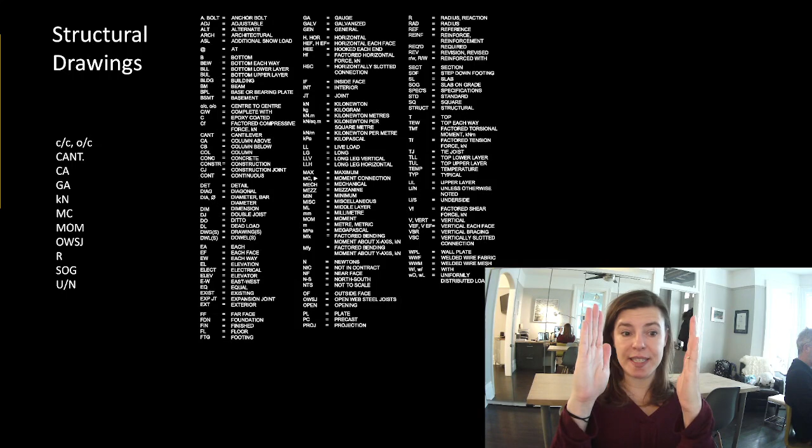C/C means center on center. So that means from the center of one thing to the center of its similar thing, that's the distance. So for example, wood joists, we often say, are 16 inches center to center, or on center, O/C. And we're saying that 16 inches on center is how often that thing occurs.

CANT is an abbreviation for cantilever. We looked at what cantilevers were last week just a little bit. That's that little bit that overhangs the edge.

CA means column above. So depending on how we cut drawings, because we're cutting a drawing, we're trying to take a representation of a 3D thing and represent it in 2D. Are we cutting above and looking down? Or are we cutting and looking up at the ceiling? And there are different ways to do that. And I'm going to talk about that in a few minutes. But CA usually means column above.

So if we have a beam that's supporting a column above, we wouldn't be looking at it if we're cutting below. And we're gonna look at that in a few minutes, so don't worry about that too much. But we would often put CA to let us know that that's not a column supporting the beam, but it is a column adding a big load to our beam.

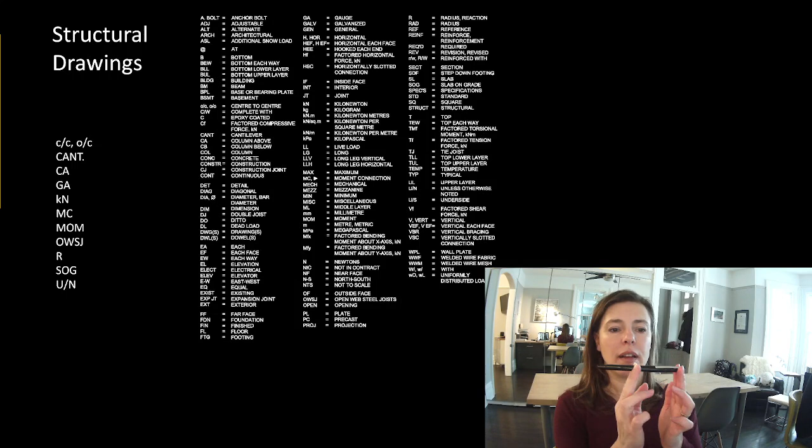MC, moment connected. Moment connected means that something is continuous. For example, our cantilever. If we have our cantilever over here, and this is our backspan, this is continuous across here. But what happens sometimes is we want that to be a cantilever, but we can't put it in like that. What we might do sometimes is cut it here and then put it back together, or we might cut two different things and put them together.

When we put them together, we're saying it's acting like it's continuous. It is one solid thing at that joint, and we're saying it's moment connected there. MOM is another way of saying moment, so sometimes we'll refer to that as moment.

Open web steel joists, OWSJ. That is something we use a lot in steel structures, not to be confused with wood joists. They're a very different thing. Open web steel joists, I have a slide of them in one of the next slides to show you, but you've all seen open web steel joists.

In this context, we're talking about reactions or radians, but radius, but often reaction or radius. So you'll have to look at the context sometimes.

SOG, slab on grade. That's the bottom level surface of your building that touches soil. Very rarely would we have a building without a slab on grade, but most buildings have a slab on grade and it is directly on the soil. And we'll talk about that this term.

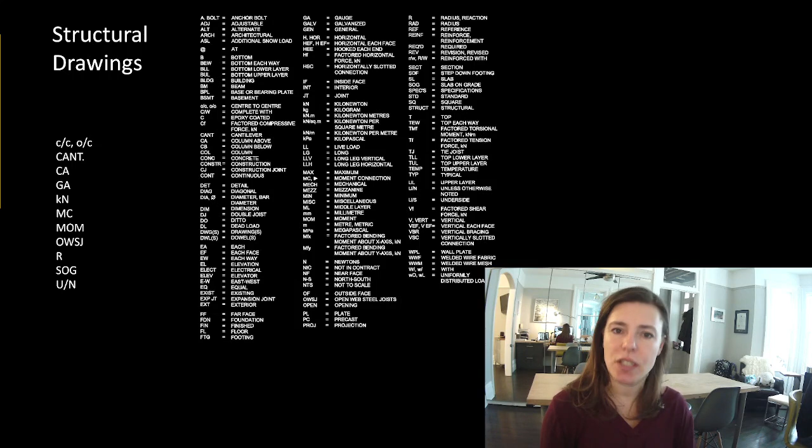UN, U/N, unless noted. So remember I talked about wood joists, 16 inches center to center, unless noted. Because maybe there's a location where we have a big gap because there's a hatch that needs to go down there or something. But that would be unless noted, U/N. You might often see me write B/C, which stands for because.

All right, in this term, these are the major ones we're going to talk about. CF, factored compressive force in kilonewtons. So remember I said if it has that little subscript F beside it, it means we've applied all the load factors to it. And remember if it has the subscript R, we're saying we've reduced the compressive capacity of that member. And remember, the reduced capacity needs to be greater than the factored load on it for whatever force type we're talking about, whether it's compression or moment or shear or tension or torsion.

We're not really going to talk about torsion in this course, but it's nice to know that torsion exists. So these are the ones we're going to talk about this term. Next year in Structures 2, we're going to be talking about all the little subscript R's. So instead of CF, we'll be talking about CR. We're going to be talking about CF too. There's a kind of a continuity between the two terms, but we're going to focus on that compressive resistance next term because we'll already know how to calculate the factored compressive load. And so instead of MF, we'll be focused on MR, VR, and TR.

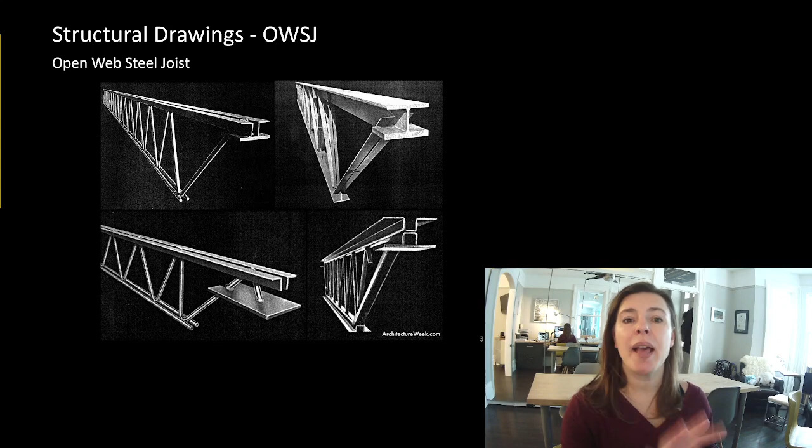Okay, I'm going to fly through a few of these things. I'd just like to get to the next segment, and then I'll stop it, and I'll go spend the day with my kids, and the next time you see me, it'll be late and I might have a glass of wine, apologize in advance, but if it's 9 o'clock at night, I'm going to have a drink of wine. I'm assuming some of you are watching this in your pajamas. Maybe you're drinking a coffee, maybe you're enjoying some other substance, but I might have a glass of wine while I'm filming later.

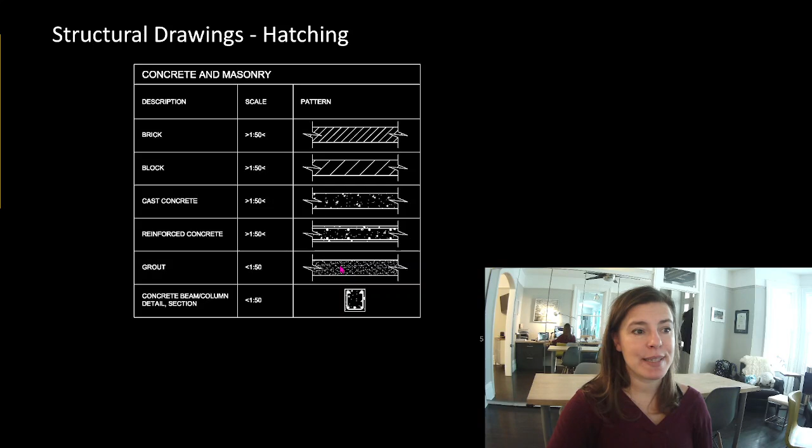Okay, I'm gonna stop here and pick back up a little bit later, but this was helpful.

Thank you guys. Okay, my husband has said he'd take the first round this morning, meaning I get to do a little more of the lecture this morning. So some of it still might end up being tonight, so I've made another coffee

and we're ready to jump into structural drawings. So I have created for you specifically a fake building. Now, I have created the building in steel and I have created the building in concrete.

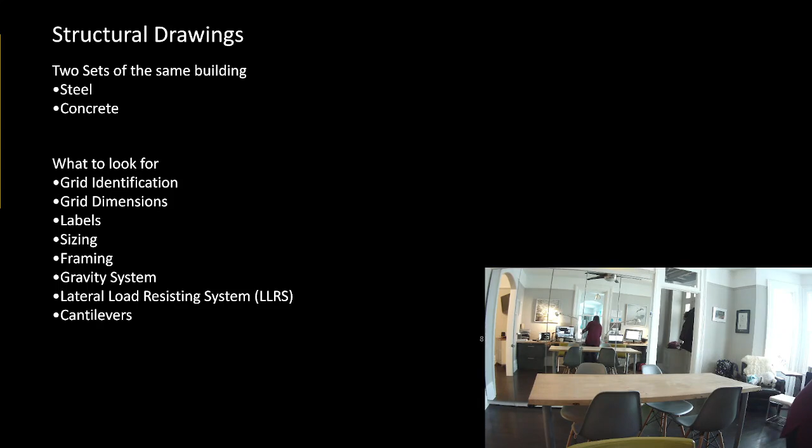In that framing, we need to have a gravity system, and we need to have a lateral load resisting system. I found my little tools for showing you guys lateral load resisting systems, and where did it go already? Hold on one second here, team. I dug through everything and found it. Here it is. Okay. Lateral load resisting systems.

This is not a wall. These are columns, and this is the beam at the top. That tips over. These are able to rotate here, so they're able to just tip over. That does not have a lateral load resisting system. If all of our building was a series of these along its length, the whole thing would still tip over. What we can do is put this in here. This is a brace. This makes it stable. That is our lateral load resisting system.

Another way we can do it is, oh, my new phone isn't the same size. My calculator? Yeah, okay. So this doesn't quite fit. Doesn't fit at all. Used to have something that was the perfect size right here. My wallet? No. Well, anyway, a wall is when we fill this in perfectly. What I'll do is I'll cut a piece of cardboard for the next time we talk to each other.

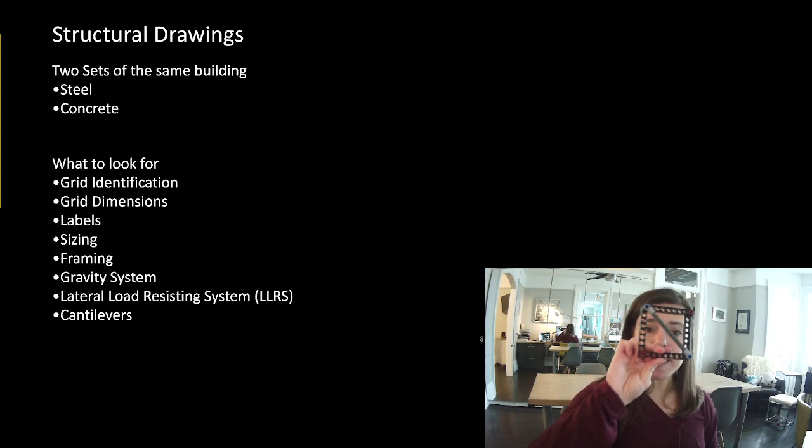So you could imagine if I cut a piece of cardboard out and fit it in here, it still wouldn't tip over. That would be a shear wall. Now we're gonna talk about all of these things later in the term, I promise. But this is your first identification of a lateral load resisting system. It's what stops it from tipping over.

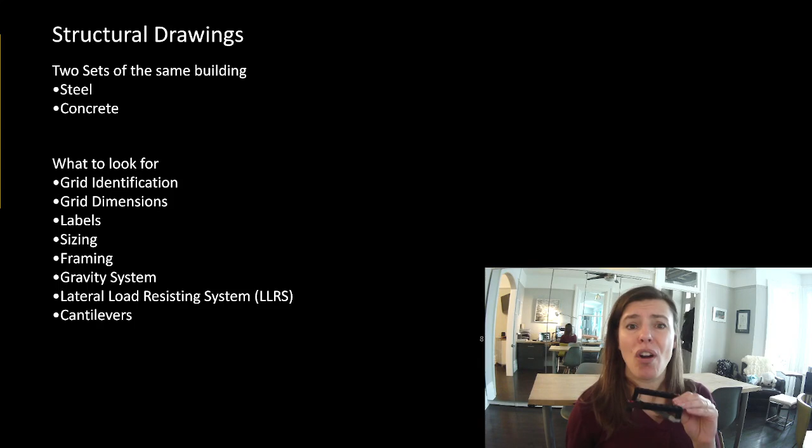We also, in plan, so if this was our floor, we need it to not do this. This is called skewing. We need our floor to not skew. So in plan, we would often do something like this. Although, what do you often have sitting on something? A deck of some sort. Plywood, maybe you've got a concrete floor. There's something, you don't want people to fall through the holes here.

In a wall, you want a doorway here. So this kind of makes sense. But for a floor, you don't want anything to be able to go through here. So we often, already embedded in this, have something here that can act as our lateral load resisting system in our diaphragm instead of that. But again, we're going to talk about all of that later in the term. So don't worry about that right now, but I am going to identify the lateral load resisting systems in the drawings. And you guys will need to do the same when you get into structures too. It's going to be very important.

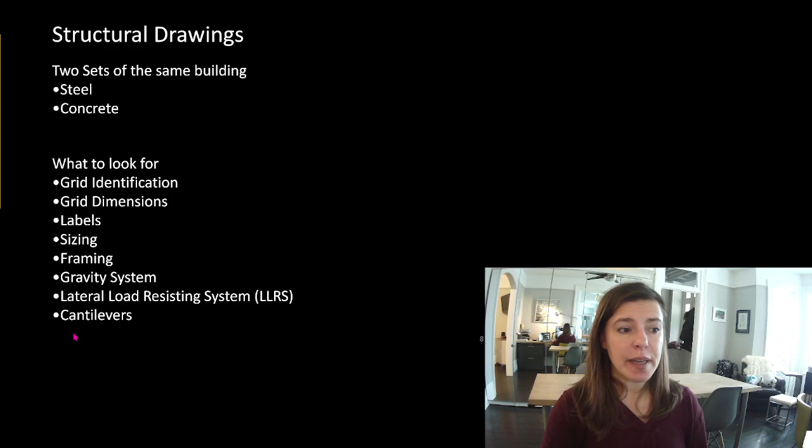Cantilevers. Cantilevers can be shown two ways. They can be shown as continuous over a support. So remember, this is our columns with a cantilevered beam, and this is one continuous member. I could cut this pen here and glue it back together, and that is also a cantilever.

All right, so let's see what I have in the drawings. No, I just have the drawings like that. So I'm going to pull them up in PDF for you guys, just because it's a little bit easier. Okay, so this is our steel building. Let's see where we start with this. Not the first page. So here's the first page.

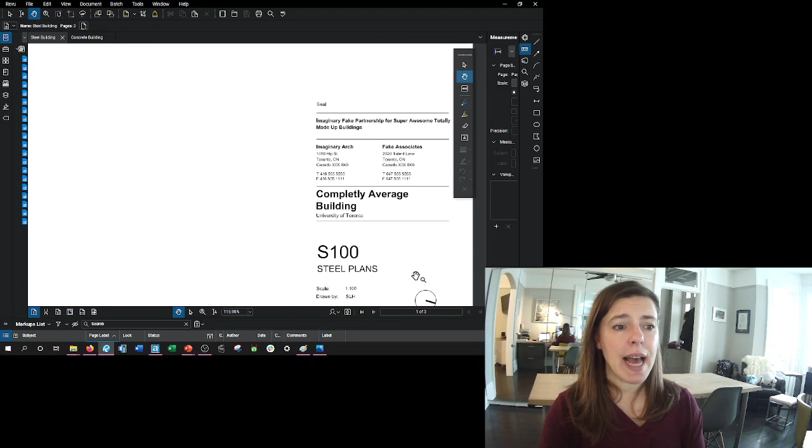You can see that I have a name for this plan. I've identified what's on this plan. I have a scale. Scale's really important. If you don't have a scale, you should show some dimensions because you need to be able to tell people how long things are. Remember, somebody needs to be able to build this. But a scale is helpful. I've got the normal stuff, like what my project is, who's done this work. I've said when I've issued it, so I created these drawings. So you can see I started this project in 2019, my fake project. I've started putting pieces on this every year.

So this project in a way tries to include all the things, which makes it a bit of a ridiculous building. I don't think anyone would actually build this building, but I've seen parts of this building in other buildings. So this is representative. I'm trying to grab all the things I could imagine you'd see in basic construction and put it in one building. But that means we have some things that would not be normal in a building, if you will. So let's take a look.

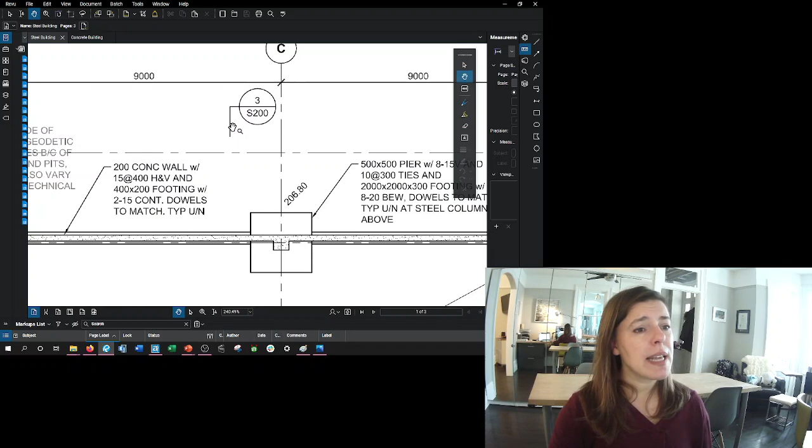Looks like this is the outline of our building. We've got grid lines. So I've got A, B, C, D, 1, 2, 3, 4. And I've got dimensions between all these grid lines. So grid line A to grid line B is 9 meters. Looks like I've got some section cuts here. So somewhere in this set, it looks like somebody took that building and sliced a line, and this little arrow means that we're, for you guys, looking that way into the building. What else have we got here? Oh, look at this. Oh, that was weird.

It says that this part is unexcavated. Now, foundations, so actually, let's see what drawing we're looking at here. We're looking at the foundation plan. So the basement floor datum is at 0. So the basement floor is at 0, and that's at geodetic elevation 205. Where crossed and noted, the local datum for raised or lowered areas is given to the basement floor. There's some other notes here. Okay, so these are the normal notes you would see on a set of drawings.

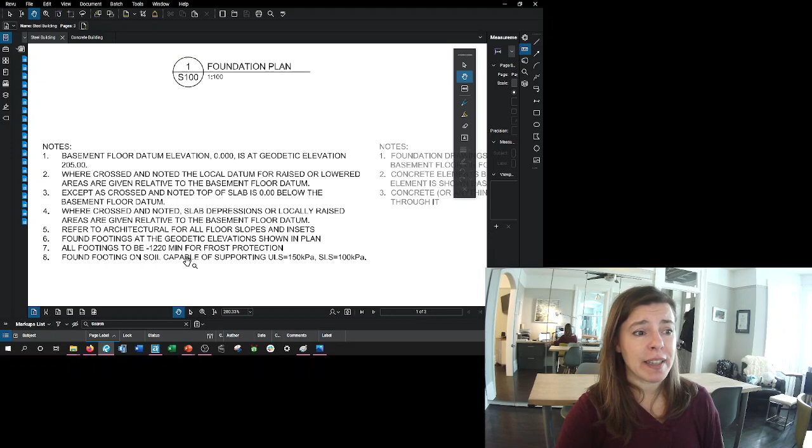Look at this. Found footings on soil capable of supporting 150 or 100. All footings to be minus 1.22 meters min for frost protection. These are things we're going to talk about later in the term. 100%. In fact, this line here is one that I will definitely have in the final exam, promise. But we'll talk about it again, so you're going to hear me say that more than once. These notes are the ones that are explicit for us to talk about. So the light gray notes wouldn't normally show up in the drawings.

They're the things that are already understood by most people looking at the drawings, but I thought you might not have seen them before, so I wrote them out explicitly. So foundation drawings are typically cut above the basement floor plan or footings and look down. So what we're saying is, if this is our building and this is the basement, ground is right here, level 2 is here, and the roof is here.

So if this is ground with a ground floor and this is a basement, we're cutting in between those two things and we're looking down for our foundations. I'm going to tell you that's the only time I do that. It's the only time I cut and look down. So concrete element beyond another structure is shown dashed because we can't see it. And anything that we're cutting through is hatched.

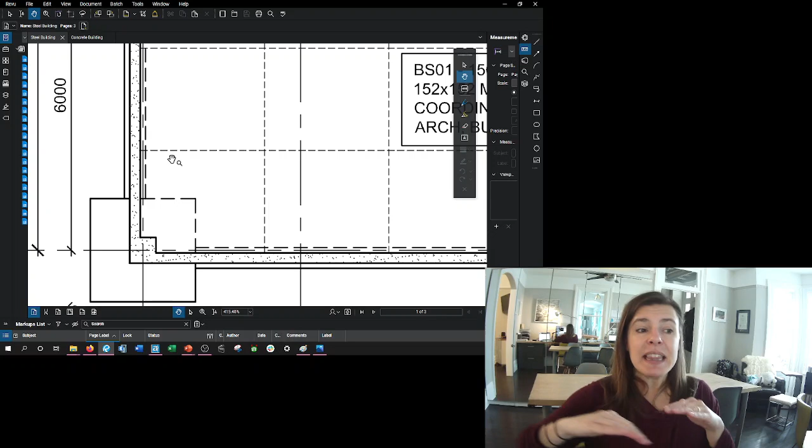So let's take a look at what that means. So if we're cutting between the basement and the ground floor, we're cutting and looking down. That means any walls we're cutting through would be hatched, and the footings, which are below us, would be a solid line, unless it's below something else and then it's dashed. So this is our basement floor. So we're looking down at our basement floor. And it says it's a 150 slab on grade with mesh in it and saw cuts.

This is our wall. So we're cutting through it, so it's shown hatched with solid lines. We're looking down at a footing. So here's a footing. This part of it is solid, but this part of it is dashed. What's preventing us from seeing this part of footing? Yeah, it's the slab. We've got the slab on grade here preventing us from seeing it because the footing is just underneath the slab. We've got dimensions here. You can see we've got more footings.

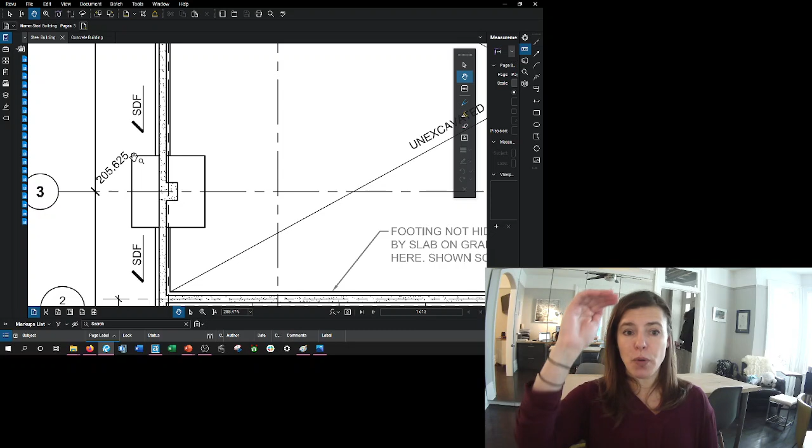Over here, look, these footings are drawn solid, and this says unexcavated. What this is saying is there's a basement here, but not a basement here. There's a ground floor, and so these foundation walls are just for frost protection to protect this part of the basement. We've got a note here. This is saying the bottom of the footing. So this says where the bottom of footing is in a geodetic elevation. This SDF means step down footing.

If this is a basement, we have to dig down some amount and take out all that soil. This here, we have to dig a little bit where we're putting the foundation walls. And you saw a note on the drawing that said we have to be down at least 4 feet or 1.22 meters for frost protection. But 4 feet isn't enough for a basement, which means obviously these footings need to be a lot deeper. So we have to get from 4 feet down to someplace deeper. Well, you can't just go along with a footing and drop down and keep going.

Remember last week I talked about how if you dig a hole in the sand and you stand beside it, it wants to push that soil in. Well, that's called an overburden. If we did that right here, we'd be pushing hard on these footings, and we'd be undermining this part of the footing. So what we do is we step it down slowly. And so these little arrows are telling us that from this datum to this datum for underside of footing, we're going to be doing some transition. And I show you that in the next page, so don't worry about it.

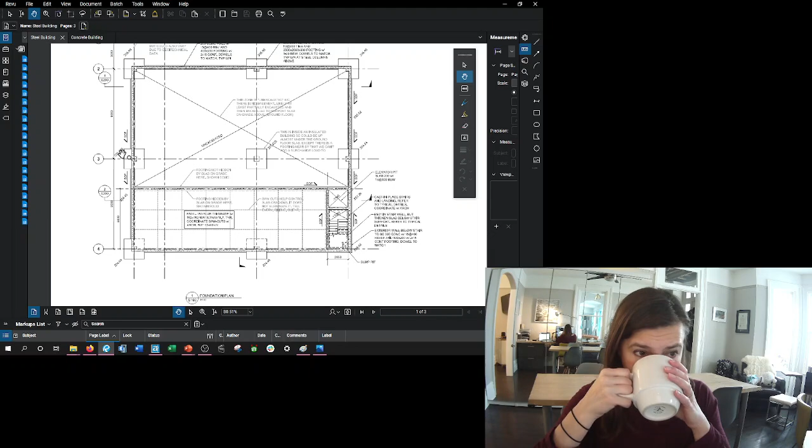We've got some stuff happening over here. Okay, we've got an elevator pit here. We've got a stairwell. So we're showing this stair. There, it looks like there's a doorway that you come in here. And you go up like this. We've got a little thing here that says sump pump. So usually we have to pump water out if ever it flooded in here. And so this is where all the water would drain to.

What other plan notes do I have? Okay, so these are the things I told you about the slab on grade hiding this. So this is inside the insulating building, so it can be almost to the underside of the slab. This doesn't have to go down 4 feet because the building is protecting it from frost. This zone is unexcavated because there is no basement, likely at least partially excavated and then backfilled to support the slab on grade above. That'll be shown on the ground floor. So let's go to the next drawing. We'll come to this in a minute. All right, we've got all of the same grid lines.

This says it's, whoa, that's weird that it's zooming in hard on me there.

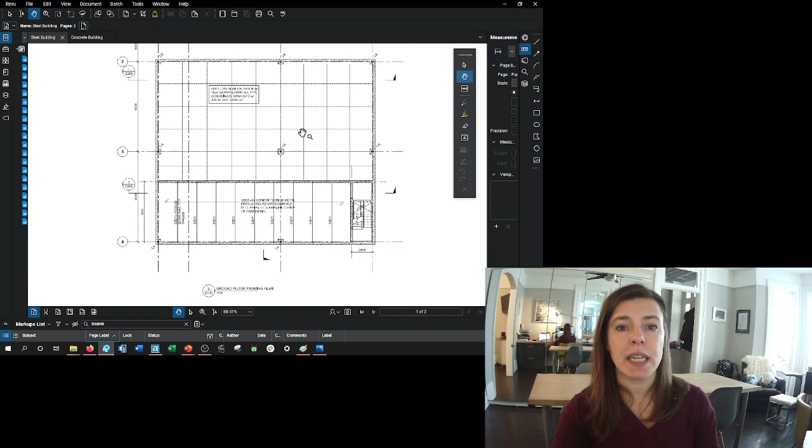Ground floor framing plan with our scale. We've got section marks. So now look at this one. This has a basement underneath it. This doesn't. This part of the floor is sitting directly on soil. So we have a 150 slab on grade. It's the same slab as what we had in the other basement. We've called this one GS01, or ground slab 01.

Let's see what we called the other one. BS01, basement slab 01. I called them 2 different names even though they're the same thing. I could have kept them the same, but in my experience, sometimes what might happen is I'd make a change here, but I didn't mean for it to make a change to this one. So I often would like to name them with different things. Sometimes the other way is helpful. It really depends on the project and what your intent is.

Okay, so let's take a look at our notes here. Ground floor datum. Oh, look at this. Live load. Typical ground floor dead loads. We're going to talk about loads in a few weeks. All right, over here in our plan notes. This is cut looking up. So we're cutting through the foundation walls, right. So this is just before our ground floor. We're cutting looking upwards now. We're cutting in the exact same spot as before, but looking up now.

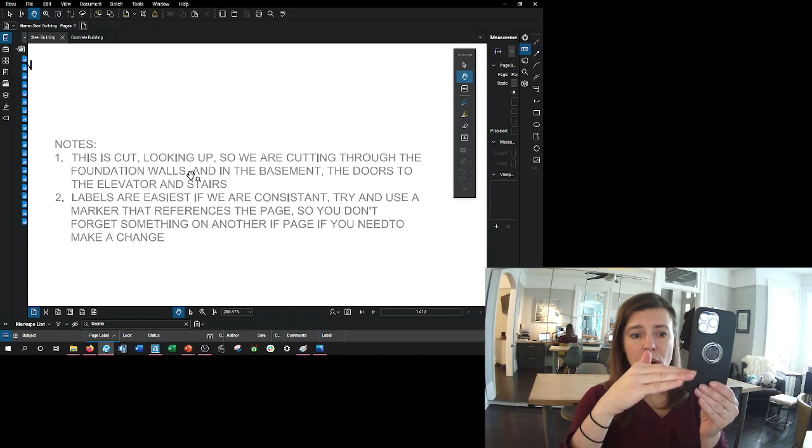So remember, basement, ground floor, second floor, roof. Before we were cutting here and looking down. Well, now we're cutting in the same spot and looking up. So we're looking up at the underside of the ground floor, but we're cutting through all the basement walls. So we show our walls the same. We're not looking at the footings anymore. The footings were on the other page when we cut and looked down. So we see the framing for the ground floor, and we see our slab on grade here, but we're cutting through these foundation walls.

Now look, I've made a note CA, or column above. That's telling me that my column is sitting above what we're cutting through. It's helpful to show this column though, because it gives a little bit of context. It tells us that we've got a big point load here. It's very handy to get in the habit of showing your column above where it stops, even if it isn't on your plan. If this was 3 stories up, I wouldn't do that because it doesn't really have an impact on this particular plan. But I know at the top of this concrete wall, I have a column sitting here.

And that's handy to let me know why I might have this notch out here. See, if I had brought this wall right around like this, there would have been nothing to support this column. So I kind of notch out my concrete here so there's something to hold my column up.

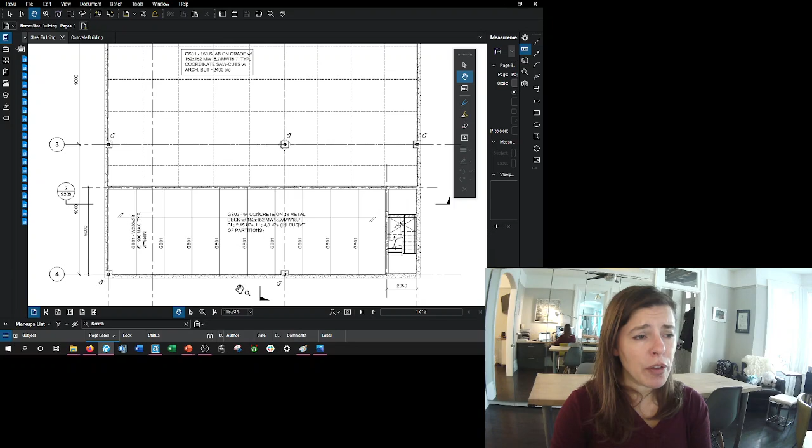All right. What other information? Oh, look, I had to add this dimension here because this wasn't on a grid line. Now, I would always recommend to an architect that we make this a grid line. If there is major structure on it, it is very helpful to give it a grid line name. Grid lines are helpful for architects, but they're vital for engineers. We really like major elements on grid lines. What I would often do, even if the architect doesn't have a grid line, is I would maybe call this 3' or 3x or a little i, something that I could then communicate in a schedule what line this is.

Okay, what else do we have here? Before we had been cutting through a wall looking down, now we're cutting looking up. We've got our doorway cut, and look, you can see that we're showing framing for this stair. Those dark black lines are saying we've got steel there. It looks like at our ground floor we had cast-in-place concrete, but up above that it looks like we're switching to steel framing. There's our elevator.

Okay, let's take a look here. GS02. Well, our slab on grade was GS01. This is our ground floor slab number 2. It's saying it's 64 concrete on 38 metal deck. Again, we're going to talk about that later, but just to help you out, metal deck, when I say it's spanning in this direction, if I take this piece of paper and try to support it here and here, you know that it does this. It doesn't have any strength. But if you want to, try this out. If I accordion fold this piece of paper, so I'm just folding it like an accordion.

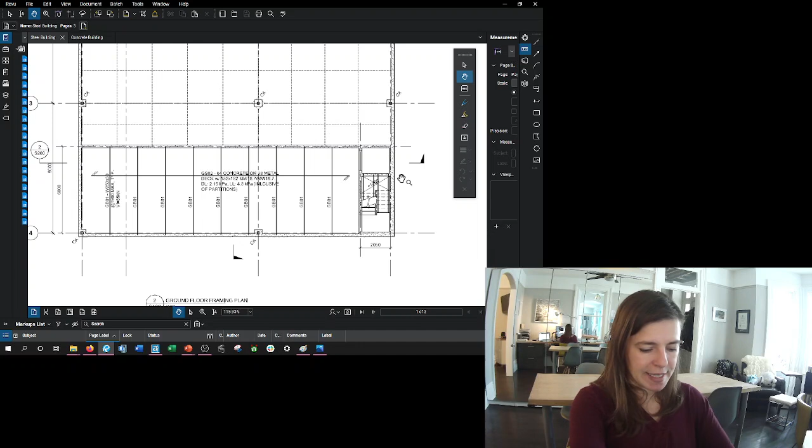It's kind of crazy. Okay, so I've got my accordion folded piece of paper like this. When it was a flat piece of paper, I couldn't make it sit on my hands. But look at this. It's the same dimension and it's the same piece of paper. And I've put it like this, supported in the same way, and now it spans from this hand to this hand. That is the span length of our element here. So, what happens though if I try to put it this way? You know, it still doesn't work.

Intuitively, you know that. So when I show these arrows here on this deck, I am saying my deck is spanning like that. I am not spanning it in the other direction. It is not spanning in this direction. It is spanning across the top of all of these beams. So we have a series of beams here supporting this deck like this. So in fact,

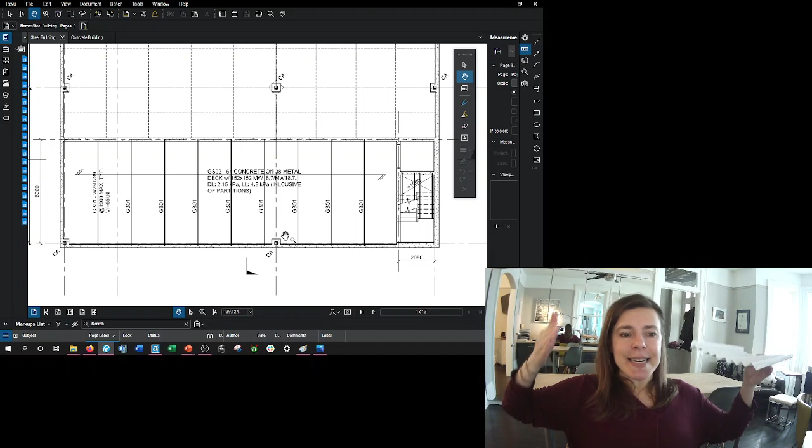imagine this folded paper kept going and it was this long. It couldn't span that whole distance, so what I've done is I've put a beam here and a beam here and a beam here and a beam here and a beam here. The span length is the distance between those beams. If this paper was really, really long, it still couldn't span that distance. It needs a support every so often, even though I've made it folded so it has some rigidity. So those flutes are running in this direction, and these beams and this wall are supporting the deck.

You're going to get used to this. That means this cut here, I should be able to see my little flutes when we get to that. So let's just keep that in our head, GS02. We'll see if GS02 shows the flutes cut on that.

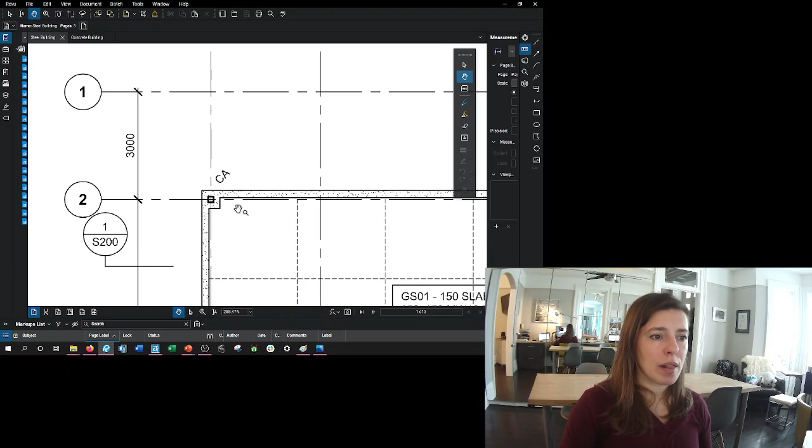All right, let's look down here. Let's see what this is. This says steel column schedule notes. So this looks like all the information about our columns. Look at this. Let's pick a column. Let's go to this one, A2. So A2, looks like here we've got a footing and a blob of concrete when we were cutting looking down. When we were cutting looking up, it said there was a column above, and we see there's a blob of concrete, and we know up above there should be a column above. We haven't looked at it yet, but let's see what A2 has to tell us.

Very first one is A2. So look at this. Here's level 2. Here's our ground floor. It looks like our column starts just below the ground floor, and here's our basement floor. We were cutting here and looking down the first time. The second time we were cutting here and looking up. We have our loads, and we have something that says refer to plan for our footing. Let's go back and look at our plan and see what it said.

Oh, look, 500 by 500 pier with 8 15s vertical and 10 at 300 ties, and a 2 meter by 2 meter by 300 millimeter footing with 8 20 bottom each way, dowels to match, unless noted at steel columns above. You don't know what the heck that was all about, but you're slowly going to start to learn.

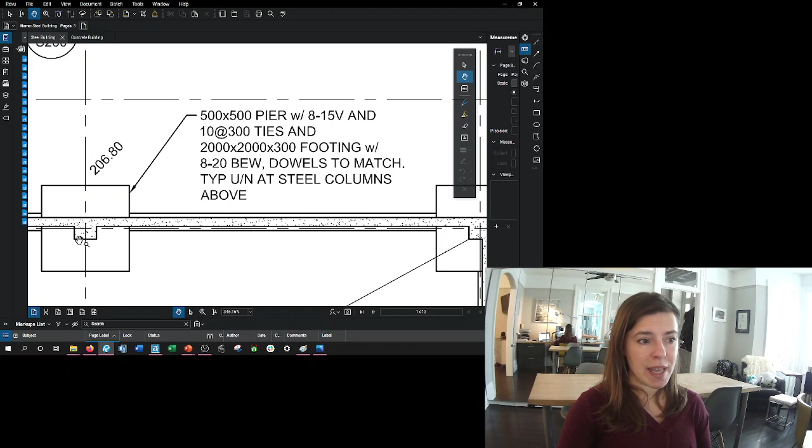This 500 by 500, that's the dimension of that concrete holding up the column. This is just the steel that's in the concrete. The 2 meter by 2 meter footing, that's what's holding up that pier. The 20 bottoms each way, that's the reinforcing. Don't worry about that right now. Dowels to match just means that there's pieces of steel that go from this into this. Okay, let's go to the next page.

Okay, level 2 framing plan. Things start to get a bit busier here. There's a lot going on now. Let's start with our notes. I find that the easiest. All right, level 2 framing plan. Level 2 framing datum. We've got some notes here. It tells us some information about loads.

Snow load. It says ASL is shown. Well, that's accumulated snow loads. We've got low roof dead loads, balcony dead loads, interior dead loads. So there's all kinds of different loads. It seems like they apply in different spots. Like this looks like it's a balcony. This looks like it's a low roof. And this is the interior of the building.

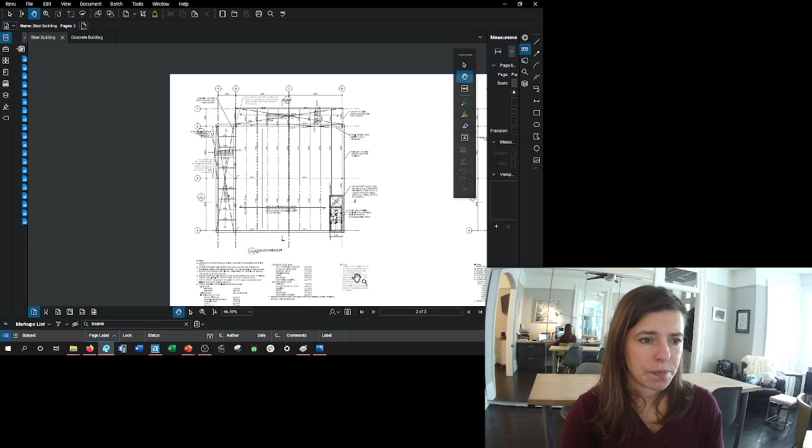Let's look at our notes. This is cut looking up. So we are cutting between the ground floor and the second floor and cutting up, which means the columns from the first floor to the second floor are what we're cutting through. Anything above that, if it's not continuous down through the building, would be a column above.

Let's take a look here now. Let's see what some of our notes are. Column above between second and roof impacts beam, so it's helpful to see even though we aren't cutting through it. So this column, now this is what's important. See this beam, 2B13? It starts at this column. See that it doesn't break here? It's a solid line that keeps going through.

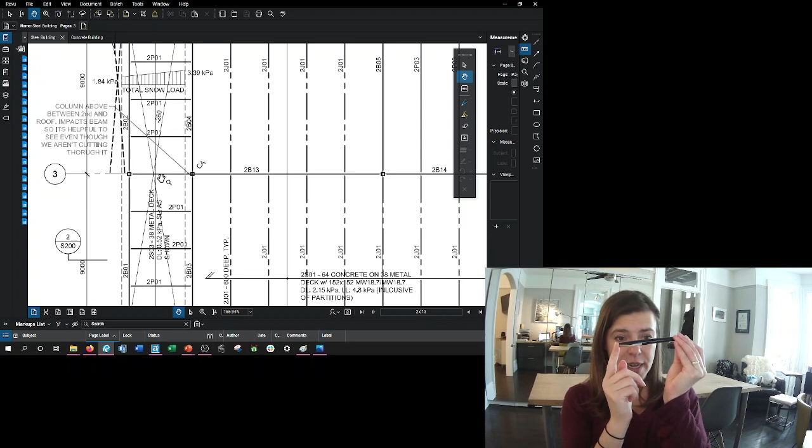And then it's broken here. There's a space between this beam and this column. That tells me that this beam, 2B13, starts at this column and goes to this column. And this column here, CA, is a column above. So I have a beam supported here and here, and right here, there's a big point load coming down on it. This column above is sitting on it. Maybe we'll see that in this section.

We've got, it looks like 2J01. Look at this. These lines are shown funny. They've got this double dash on them. Let's look at this schedule here. This is our steel beam schedule. Okay. Do we have 2J01 on here, or did we choose to put our joist notes right on here? Oh, look at this. 2J01, 600 deep joist. And then all the rest of these are labeled 2J01.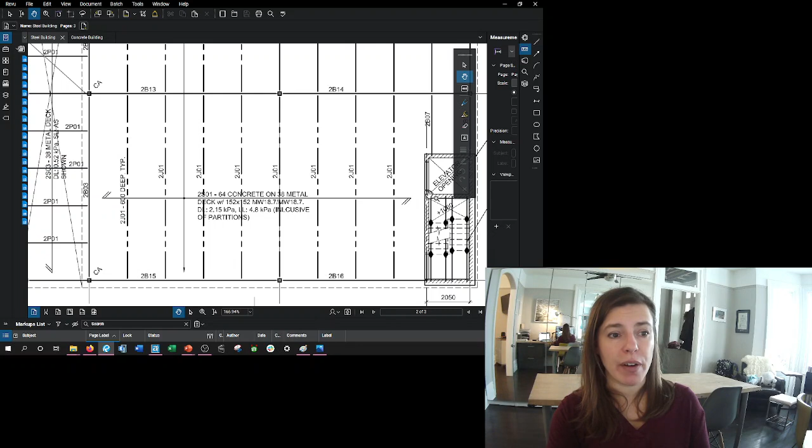So we're saying that these joists are 600 millimeters deep. It looks like we could see how often they exist if we knew what this dimension was and divided it by this many spacings. We've got concrete on metal deck spanning from here to here, but it's got a support. It's being supported every so often. So this deck we wouldn't say it's spanning all the way from here to here. We'd say it's spanning from joist to joist. It's being picked up at those joists.

We've got a stairwell here. This isn't concrete. This is dashed as block. Remember that wider dash line? 200 masonry block lateral load resisting system, LLRS, along grid line D and 4, 190 block remaining core walls with 15M at 400 grouted solid. Refer to typical details for the lintels. Interesting. So lintels are what's over the doorways.

Stair and landing designed by the supplier. But look at this. We're showing that as a beam. What the heck is this big black chunk of stuff in the middle? Well, it looks like a big solid diamond. One of the things we're going to talk about later in the term is that a solid triangle means a moment connection. So this is a landing, and this piece of steel is going to come along, it's going to crank, it's going to be underneath the stair, and then it's going to go flat again.

But steel doesn't exist that looks like that. So what we have to do is take different pieces of steel and weld them together. Remember I said with that cantilever, it could be a continuous beam, or we could cut two different pieces and glue them together. Well, welding them up is the gluing them together. And these black triangles indicate that that's what we've done. Let's see if we have any more of those. Oh, look at this. We do have that.

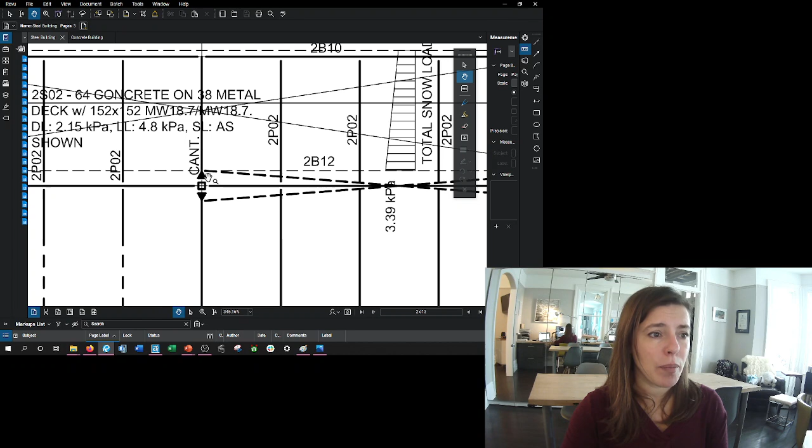This beam here is 2B05. It looks like it's 2B05 here, but it's got a cantilever. C-A-N-T, that was cantilever. Let's take a look at 2B05 because it looks like it might be interesting. Oh, all right, 2B05 is a W610 by 113. They've given us information about reactions. MC, remember that was moment connect. Moment connect right end, and they've given us a load for how much we have to moment connect it for. MF. Remember that MF means it's a factored load. So we know somebody's already factored this.

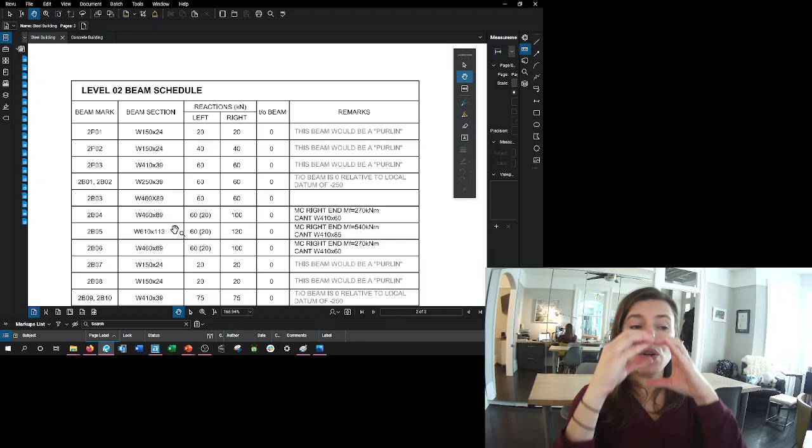Cantilever is a W410 by 85. So it looks like where we cross that line, we have two different things we've glued together to pretend that's one continuous beam. And we should be able to see that in this section. All right, both beams can't be continuous here, so one needs to be broken and welded together or moment connected.

So see, this 2B11 has a column above here. Well, that should actually be a column below. No, column above. So this beam is continuous from here to here. This beam is cantilevered, but this isn't a column here supporting it. It's got a column above. This beam is moment connected through and supported by this beam. So this beam is doing a lot of work.

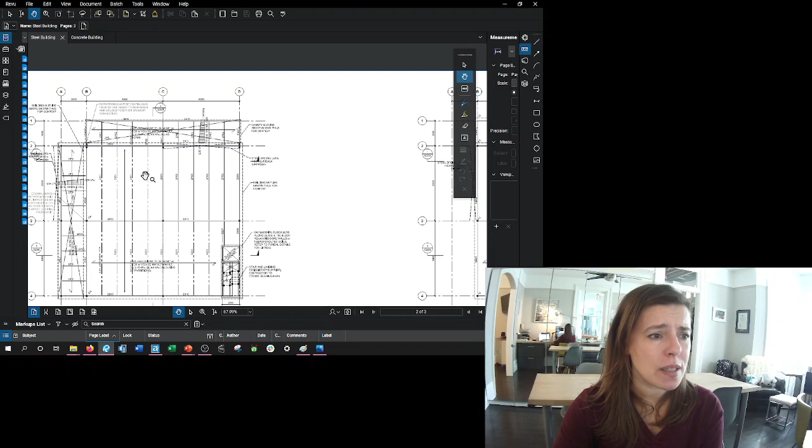Let's take a look. We had these joists here, but look at these ones. 2P03. This just looks like it goes from here to here. It looks like it's doing the exact same job as the joists were. So we had our metal deck that exists from here to here, but it's spanning. So these two little lines mean it's spanning from here to here. And these arrows are saying this metal deck exists all the way along here.

So if this is my metal deck, this is this end, and this is this end, and this is up here, and this is down here. So it's corrugated in this direction. It looks like 2J01 and 2P03 are doing the exact same job, interestingly enough.

But then 2B05, it's got a lot going on. This is a balcony, and see this here? It says our total snow load. So it looks like there's something funny happening here. We don't know anything about snow loads, but that will come up. We'll talk about snow loads in a few weeks.

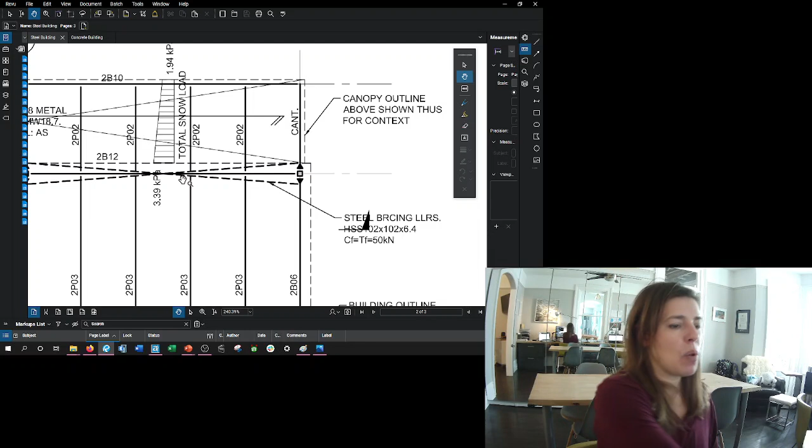What the heck is this dashed line? Steel bracing, oh, looks like I've got a typo there. Lateral load resisting system. So this is dashed because we're cutting and looking up, but we're cutting through something in elevation. Normally we hatch it, but this is a brace in the wall. Basically what we're saying is we've got this with a brace in two directions.

We've got a canopy outline. We've got a low roof here. And we've got our stairwell. So we looked at all the things here. Let's come up to our roof framing plan. So it looks like our roof doesn't come out to here. So our level 2 had a low roof here.

And remember, our basement, our interior part of the building was right here on the ground floor. So this is outside. This is a balcony. This was inside below. Up above, our building is pulled back here, and it still has a canopy on our roof. So here are our roof notes.

We've got loads, we've got snow loads. It tells us that this is our basic snow load with an ASL, or an accumulated snow load. Again, these are things we're going to talk about later in the term. We've got bracing here, steel bracing here. We've got our section marks, and we've got another beam schedule here.

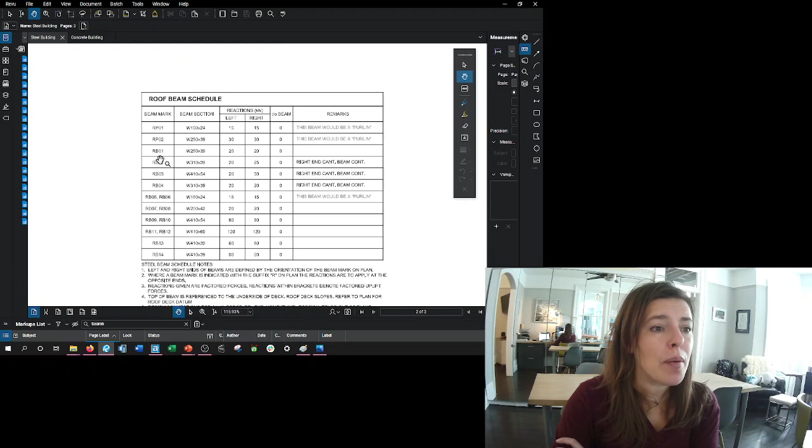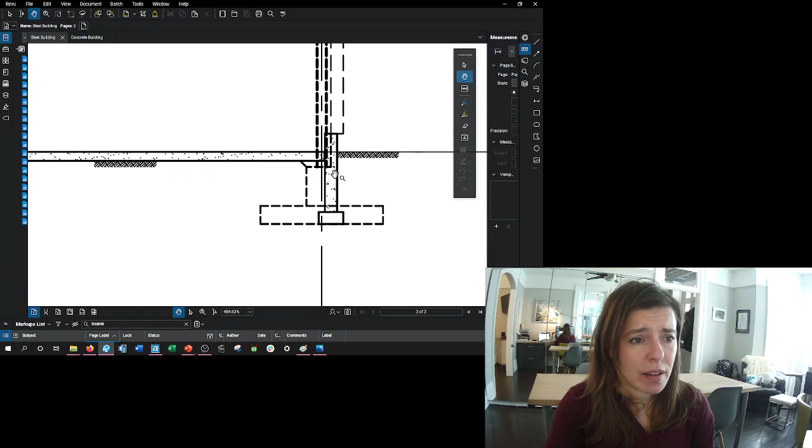If we can, and it's easy, we'll slope the structure. If it's difficult and it's hard, we won't. Sometimes we'll do a combination of the two. But if it's straight line elements and a low point is easy to build into the project, of course we'll put the drain there and just let structure do what it can to slope it for free for us. It's a little bit of coordination, it's a little bit of work. We have to know exactly what your roof drain requirements are, but we can put that into the project.

Let's look at the next section. So this one looks like it's further down the building. We're still looking at A, B, C, and D. This is where we have our basement. So look at the underside of our footings here and look where they are here. So somewhere on that building, we dropped down our footings.

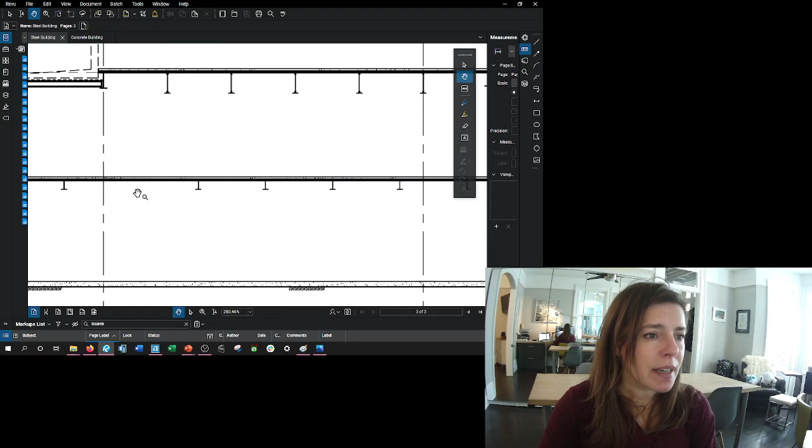We're cutting through our elevator core. So here's our elevator, drops down a little bit. Here is our lateral load resisting system block wall. And we've got structure happening in here. So here is our ground floor that we talked about. Looks like I am missing a joist here by mistake, so that's just a typo. There should be another joist there.

Here are open web steel joists, or a purlin there, a beam. Here are open web steel joists, our purlin, and up at the roof, remember we had that major beam? There's the major beam we'll need.

Again, you don't need to know what all of this is right now. It's a long process. At the end of 2 terms, you should be able to create a set of these. But you also need to be able to look at them to be able to learn how to create them. So this is a process. I'm trying to show you what these drawings look like now so you can dig into them, and then that'll help you understand what we're doing as we go through some of this process.

And here's our section the other way. So let's take a look at this. This is the one that we were hoping was going to show where we glued 2 beams together. Well, look at this. Here is our non-basement zone. Here's our basement. We come along and we have to drop down. We need this load. If this load was up high, it would try to push in on this wall. So we need to drop it down so we're not hurting this wall.

Here's our basement. There's our footing. See, this is where grade is. We're at least 4 feet below grade for all of our footings. We've got our slab on grade, and then we've got our beams and our metal deck. Oh, this is the other one. We wanted to see if our deck was fluted. It's hard to see at this scale, but these decks are fluted, cut here.

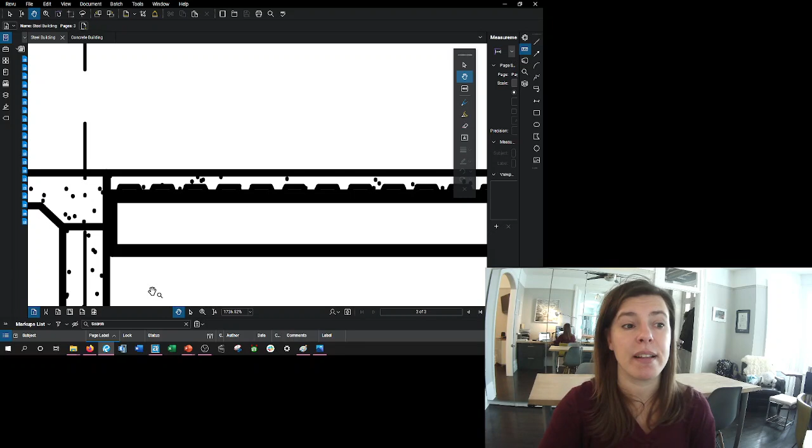Normally, I would then proceed to have some smaller scale sections. Hopefully for you guys, for next year when you do Structures 2, you guys will have this updated with a few more sections cut in it. So we've got open web steel joists here. Here's our major beam that's cantilevering out. This comes along, it breaks here, and here is our balcony that we have.

And so look, you can see this beam and this beam aren't the same beam, but remember in plan we showed that they were moment connected together. So we took 2 separate beams and essentially we had to glue steel together. And this is what I always say. If you need glue or something to stick 2 things together in building a model, you need a moment connection. With this, you can imagine if I glued this joint and this joint together, this wouldn't tip over anymore. What we would have done was made a moment connection.

And we're going to look at, and in this term I do exactly this for you guys, the difference in analyzing the internal forces on one of these and the internal forces in one of these. So we will go through and find the internal loads for all of the members in this and all of the members in this.

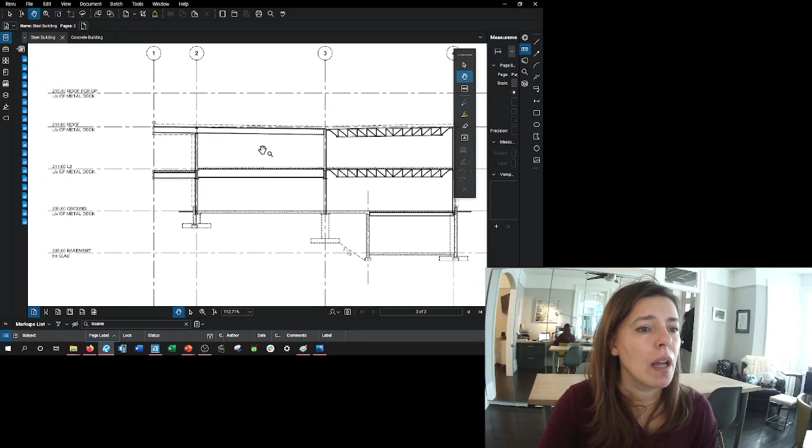Okay, so that's our steel building. I'll go through the concrete building a little bit faster because a lot of the things are the same. We're just switching some things. And a lot of the information is shown directly in the plan versus schedules, at least for a project of this size. So here's our concrete building.

All right, this is our wrong page. Let's go back to the first page. Okay, so here is our concrete building. All of the same information. So it's S100 for concrete plans. We have the same grids. Our dimensions are a little bit different now.

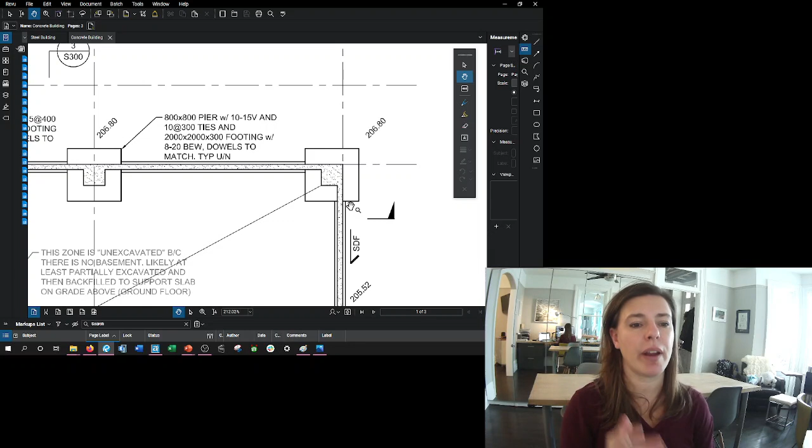Before, we had our grid lines lined up with the center of our steel columns. Here, we have our grid lines to the outsides of the walls. It's a little bit easier for concrete to represent it from the outside of the wall, and for steel, it's very, very handy to talk about it through the center of the steel columns.

Same thing here, unexcavated without a basement. Here is our slab on grade, same thing, footing hidden, saw cuts. A lot of the information is the same. Let's take a look at a few things that are different. This blob looks bigger than it did in the other drawing. These are still typically cut looking up. Everything shown dashed that we can't see, hatched if we're cutting through it.

Almost everything is the same. The grid lines are in a different location, and these piers look to be a little bit bigger, but that seems to be about it. So see, we have 800 by 800 pier.

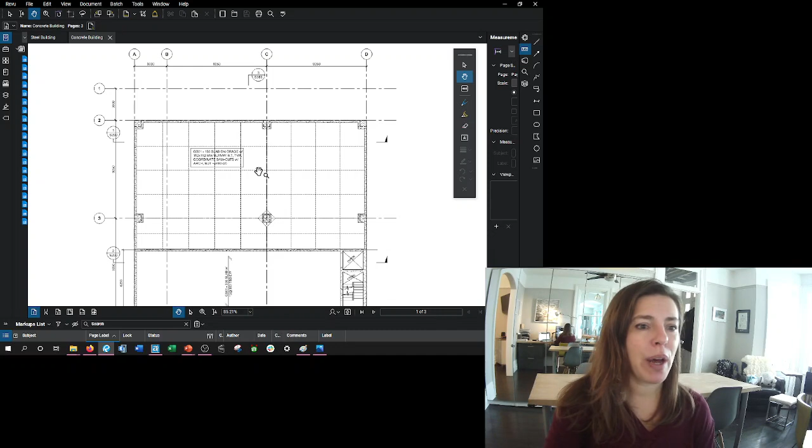Everything okay? Yep. I'm guessing a child pooped in a diaper. Diaper? Oh, just for garbage. Oh, okay. Our 3-year-old is basically a COVID baby. He was 1 when COVID started, and he's been resisting his diaper. So we have 8 months to get him fully potty trained. He's pretty good, but every now and then he likes to surprise us.

Okay. So here is our ground floor plan. This, again, looks very similar to our steel project. We've got a lot of the same notes. Some of our loads will be different because this is a concrete building now. Let's look at what's different. Our slab on grade is the same. We already talked about our piers being bigger. Let's take a look at this zone here where we're cutting and looking up at our structure.

Before, we had metal deck spanning in this direction with joists every so often. And so we had these little kind of double arrow line going from here to here with structure every so often. What we have now is something spanning from this wall to this wall. And we're saying it is a 300 slab with 15s at 300 top and bottom each way.

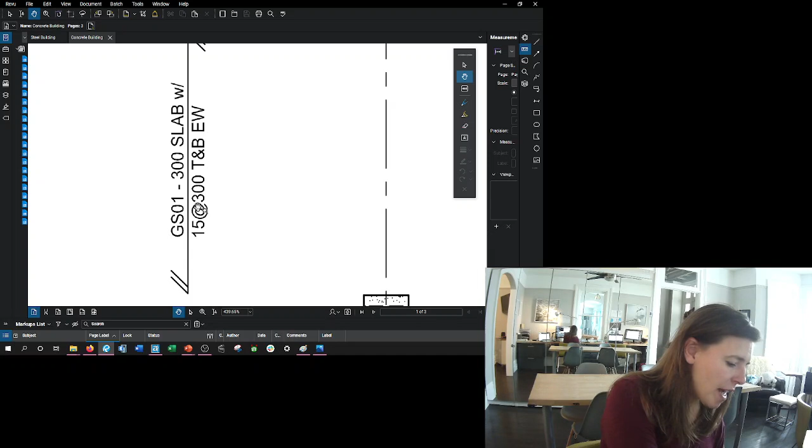This should be GS02, not GS01. So I'm finding some flaws in this. Brace typo. GS01 should be GS02. All right, so this is a 300 slab with 15s at 300 top and bottom each way.

What we're saying is, instead of this spanning every so often, we are in the shorter direction taking a bunch of steel rods and spanning them from here to here and encasing them in concrete. So our slab now spans from this wall to this wall. Our metal deck spanned in this direction, but it sat on elements that spanned from this wall to this wall.

The other thing that's different in this plan is our stairwell. Remember, in our steel building, we had a concrete foundation, so everything was concrete. But going up, we had a steel building with block walls. Well, this is a concrete building. Why would we stop and make the stairwell block? That would be bonkers. So what we have is a concrete core here. So we have a concrete wall, and that is part of our lateral load resisting system. We'll show that on the next plan as well.

So you can see, well, actually on this plan, we still would have been looking up and cutting through the concrete. So we wouldn't have shown anything different yet at this plan, but our stairs were only concrete for one level in the steel building, and then we switched to steel. Here, we're showing concrete on all the plans. So we're gonna have a concrete stairwell. I'm pretty sure I'm consistent with that. Let's see what happens on the next plan.

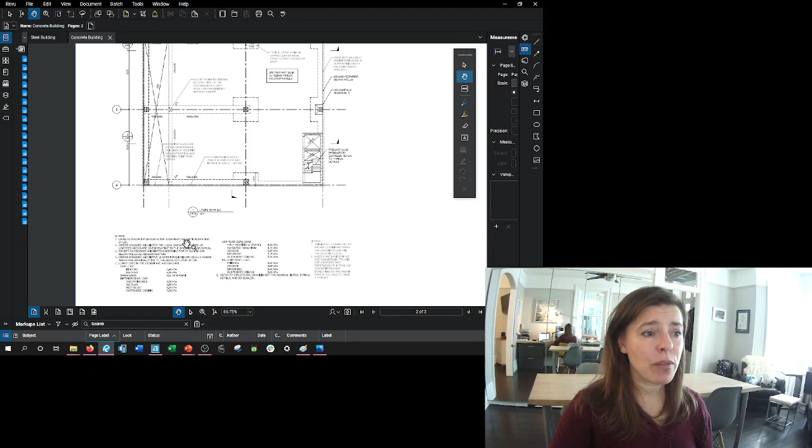Yes. Okay, so here's the next plan. We have our concrete shear walls. We are cutting, looking up at our second floor. This is our low roof, and this is our balcony. Why would we have this roof low? Well, one of the reasons is if these are flush and water pooled on here, it can run inside your building. You always drop a low roof relative to a floor area. It's absolutely ubiquitous. If you have ever been on a deck, you often have your deck down a little bit.

Where that differs is in accessibility areas, but a lot of work is done to avoid moisture flow. And often there is sloping. We'll put a protection above it in some way, anything to protect the system below. Because water getting in things, as you're probably talking a lot about in your building systems lectures, is a huge problem. It's not a structural problem, but it can create a structural problem. So structure will do whatever it can within its scope to prevent that from happening.

Okay, exterior slabs are often dropped for build-up for roofing, waterproofing, and keeping rain from doors. Okay. Exterior grids are at the wall lines. There we go. So what is all of this dashed stuff? What's happening? We don't have any of our steel beams cluttering up this area.

Let's take a look. This is a 250 two-way slab with 15s at 400 top and bottom each way with 150 drop panels. Drop panels are the thing that we put around columns because we don't like the way slabs act in shear in concrete. Remember I said shear is like taking Jell-O and supporting it on a toothpick. That Jell-O wants to slip down around the column.

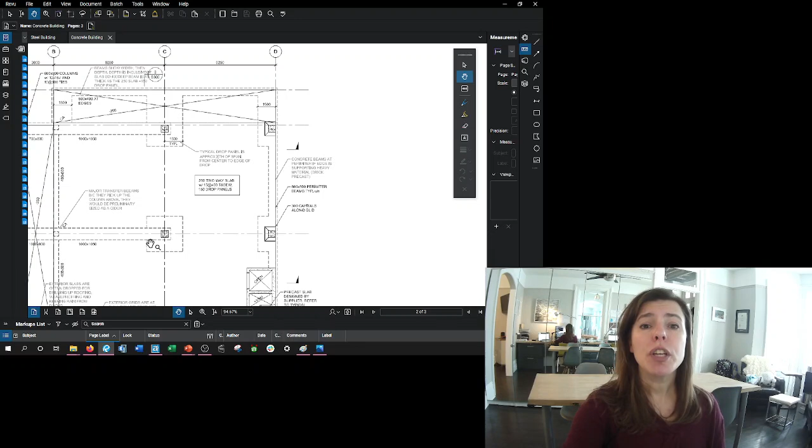Imagine if you put a little piece of paper at the top of that toothpick and then sat the Jell-O on it. It would be more likely to hold itself up there. Well, that piece of paper is like our drop panel. We're helping reinforce for shear around our column. All right, what else have we got? We've got these dashed lines.

Let's see. Major transfer, look at that typo, beams, because they pick up the column above. Oh, it looks like these dashed lines mean that they're a beam. Even though we're cutting looking up at these beams, we often draw them dashed, just because it gets too busy to look at otherwise.

So looking at the sections of these is going to be really helpful. Let's take a look here. Perimeter beam, show width, then depth. So that's how wide it is and that's how deep it is. So look, all of these beams, they've given us information about the beams. Okay, let's take a look at the next plan. So this is the roof plan. This one doesn't have any beams in this area and just a little bit of beam here to cantilever out.

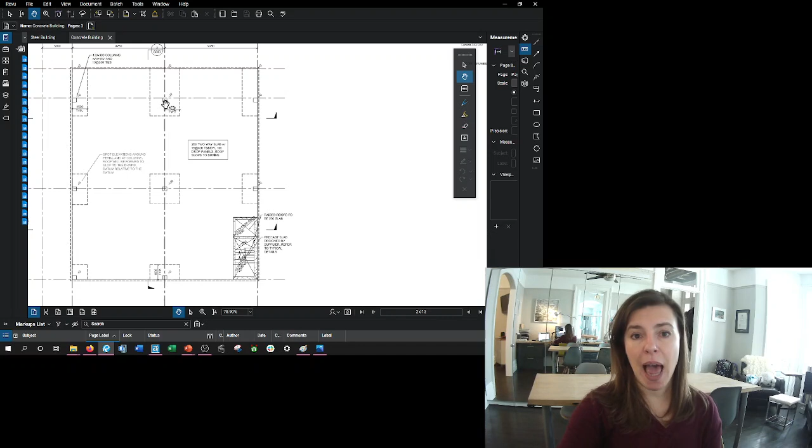We have our two-way slab, meaning our slab is being supported all the way around its perimeter. Now, what's not apparent in this and would be in a final design is at these perimeters in the slab, we would put a lot of extra steel reinforcing. Basically, we would make beams, but we'd hide it in the depth of the slab so you wouldn't see it stick out below the bottom of the slab.

We've got our concrete walls here. They're acting as our lateral load resisting system. We've got our slabs in here, and there's our elevator core. We've got drop panels still. Oh, look at this. We're showing 0 and minus 150. Spot elevations around perimeter and at columns; roof will be formed to slope to the drains. So we can do the same thing we did with the steel. This is going to be a low point and a drain will be put there to gather up all the water and funnel it down out below the foundation somewhere.

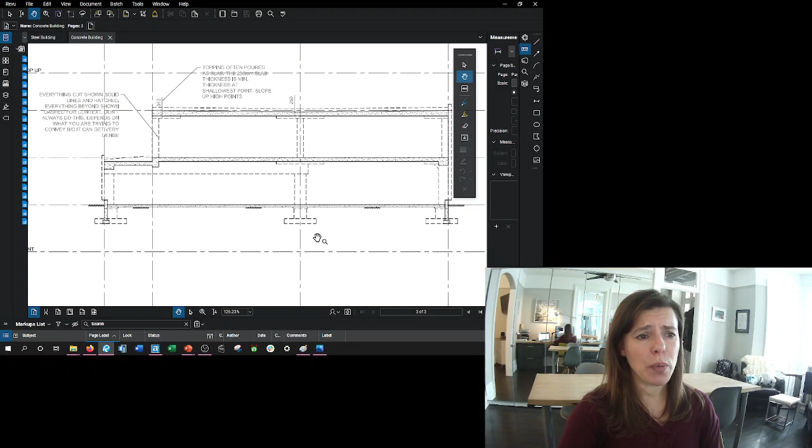Okay, let's look at the third page, which is our sections, because these are really helpful to show what we were talking about with those column capitals and drop panels and everything. So here we are. Here's our section. This is through the part with no basement. There's our foundation walls. Remember, we didn't have concrete walls. Here we're showing our concrete column beyond and our pier and our footing.

And then here is what we're cutting through. We are cutting through a slab here. We're cutting through our perimeter beams here. So you can see there's a beam and there's a beam. Here's our low roof right here. Here's our beam beyond, that big beam beyond.

And here is our drop panel here. And over here at this edge, we actually had a capital as well. So we're cutting through a beam, and beyond we have a drop panel and a capital and a column. Our column got smaller as we went up the building, and here's another drop panel.

Here's the same direction but pulled back a little bit where we have a basement. So this is a much simpler drawing. You can see it looks pretty plain. And then here's our section cut in the other direction where we'd be cutting through some of those major beams. We've got our unexcavated area with no basement. Here's our basement.

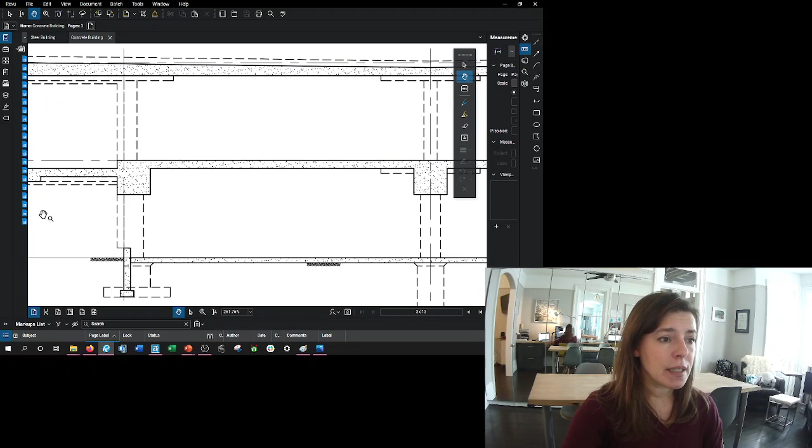We step down our footings. We're cutting through some major beams here. We've got drop panels beyond. And then here is where we have our balcony, where we drop down. And remember, there were beams that cantilevered out as well. So that is really just a quick look at some drawings.

This isn't in the curriculum that I'm supposed to provide to you guys, but I don't know where else you would possibly learn it. It's a hard thing to teach. The best way to get experience with drawings is to use drawings. To have somebody walk through and talk about all the things in a drawing, I get, is ridiculously boring, but I don't know a better way to teach it. Having you make drawings is going to be helpful, which we definitely do in the end of structures too. But we have to be able to read them to get to that point.

And so we're going to spend a lot of time looking at structural drawings. And some things I'm going to expect you guys to just know. And for a lot of stuff, I'm going to give you just little part plans of structural drawings so that we can do work based on them. Okay, so here are all the drawings. These are just captures of that. But remember, you have these. I gave you the PDFs for these.

Okay, so we talked about the typical details. These are the drawings that I created, these are projects I worked on in the past, and the architects have kindly given permission for you to have access to their architectural drawings as well. So Varsity Goldring Centre for High Performance Sport is the project I did. In some ways, it's an extremely complicated project, but there are zones of it that are very simplified. MJMA and Patkau both gave permission for me to share a pared down version of the architectural drawings, and I've given you as much of the structural drawings as I can.

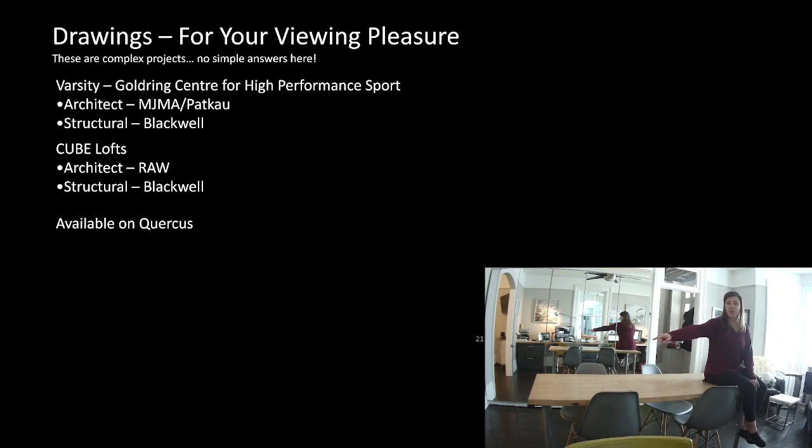If I sit down here, how much of my load is going to this side and how much of my load is going to that side? Again, intuitively, I think you know that all of my load is going to this side and none of my load is going to that side.

Intuitively, what if I laid full out on the table? How much of my load is going to this side and how much of my load is going to this side? Again, intuitively, you know probably half of my load is going there and half of my load is going there. I know I'm not evenly distributed with my load, but if I was, you understand that half of it goes to each side.

So these are the things you intuitively understand that somehow over the next 10 lectures, I'm going to screw you all up and you're going to not remember to think about it basically. So before you ever start any problem with me, stop and think, what do I think is happening? Where do I think these things are going and how do I think they're working? And I tell you, if you do that, you will probably do amazing in this course.

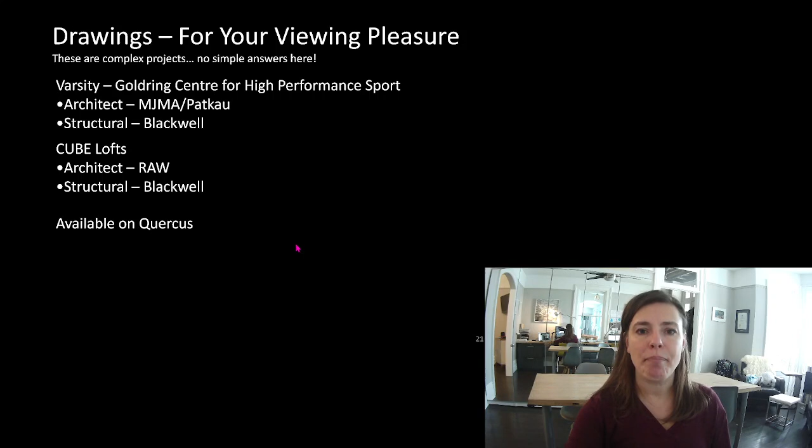All right, I'm going to take a little break and then we're going to talk about tributary area and tributary width. Okay, so let's talk about tributary area.

I poured myself a water and already set it down somewhere else. Hold on a second, team. All right, here I am. Okay.

Tributary area: the area of load that impacts the design or deflection of a structural element. This is what I was saying. When I sat at the middle of the table, let's do this again, just because I find it very helpful. All right, if I sit right here, way up in the middle of the table, you know that intuitively, half of my load goes to that end and half of my load goes to that end.

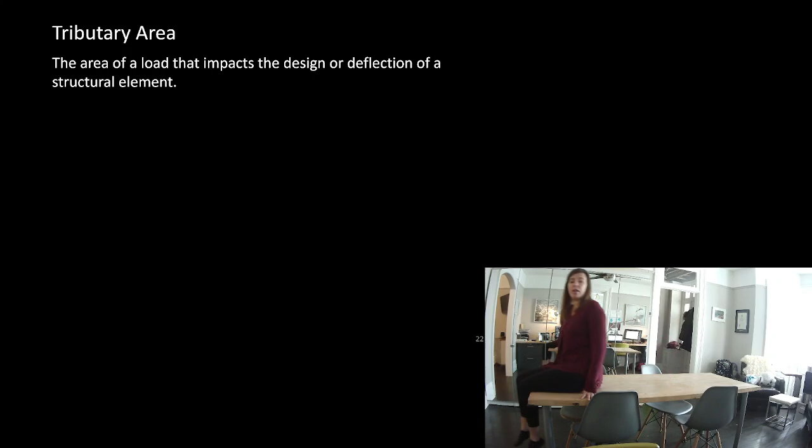You know that at the corners of this table, there are 4 columns supporting this table. You know that this table is spanning to those ends and that a quarter of my load is going to that leg, a quarter to that leg, a quarter to that leg, and a quarter to that leg. If I move up here and sit right in the middle of this end, maybe right on the edge, you know that none of my load is going down there and all of it is going to this end.

Half is going to this column and half is going to this column. If I switched and put all of my load right here, this is an ab workout to actually sit like this, you know 100% of my load is going to this corner of the table. So you intuitively understand tributary area.

Now, what if you took me and turned me into a piece of paper that was evenly distributed across the top of this table? You would know that a quarter of me went to each corner of the table. That is what we're talking about with tributary area and tributary width.

All right. I find it very easy to talk about tributaries first as a watershed. Let me use something, Dave bought me a weighted blanket. Here's a good way to talk about it. That weighted blanket, you know, a quarter of its weight is going to each end. What if I put that weighted blanket at that end, and now I sit in the middle?

I am different than that weighted blanket. Half of my load goes to that end of the table, half of my load goes to that end of the table, but all of the weight of the blanket goes to that end of the table. So this end of the table is supporting half of Shannon, and this end of the table is supporting half of Shannon and all of the blanket. So the same thing doesn't put the same load in all the places together.

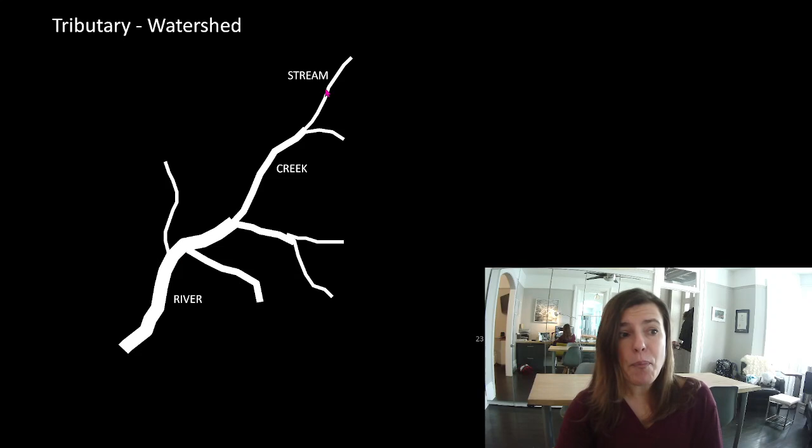Now, if you're walking through the woods and you come across another body of water, you'd be like, oh, look, a river. But in the context of the overall system, maybe we call that a stream. And a stream just means it's not doing quite as much as the creek maybe. But a stream doesn't have to flow into a creek. Our stream could flow directly into the river. There's nothing that says the stream must go into a creek, which must go into a river. Usually it does, but our stream could go directly into the river.

Now, you're walking through the woods and you come across a flowing body of water, and you say, oh, look, a river. But in the context of the overall system, maybe we'd say that one was a brook because it was the smallest one of them all, or it had the least flow. We don't really know what the designation is, except that in the context of the whole, the brook is the one doing less work than the stream, which is doing less work than the creek, which is doing less work than the river.

A brook could flow directly into a river or a creek, but often they run into a stream. So there's no specific order they have to go in, but usually it is brook, stream, creek, river. So again, context is everything that makes it important.

Now, in a watershed, it could snow over here and rain over here. This snowfall does not necessarily happen over the entirety of this system. This brook could see 100% snow over its tributary. This brook could see 100% of this rainfall over its tributary.

This creek would see all of the snow from this brook's tributary, but none of the rain from this brook's tributary. But this river would see 100% of the rain from this brook's tributary and 100% of the snow from this brook's tributary. It is very similar to this column taking 100% of the weighted blanket load and 50% of my load. It didn't necessarily take all of both loads.

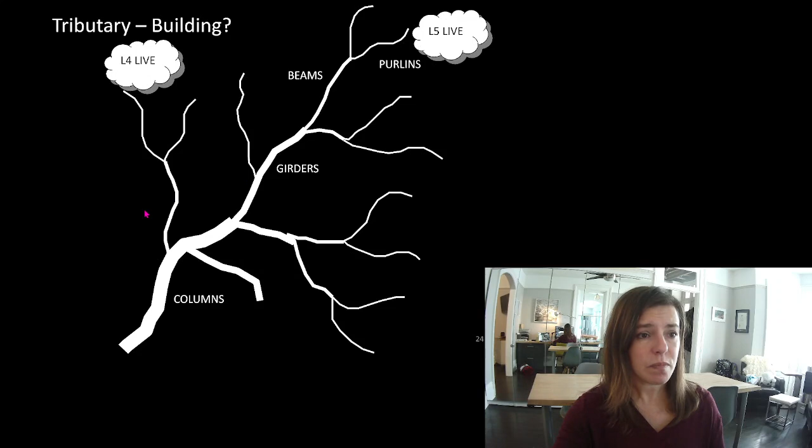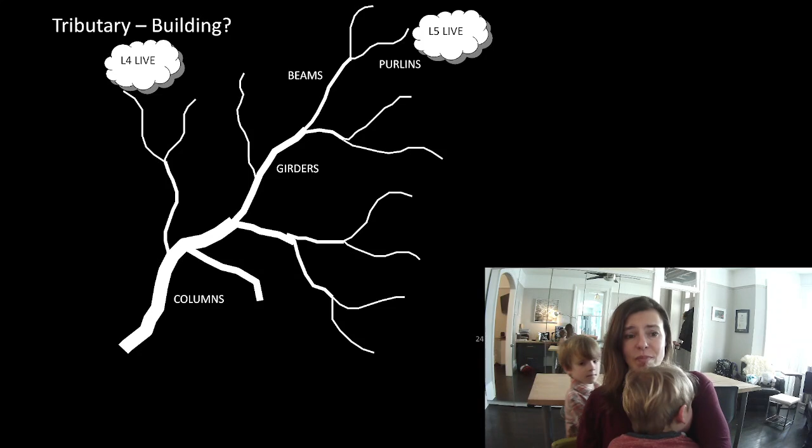I have a crying child running towards me. So if this is our 5th floor live, and this is our 4th floor live... what's wrong, guys? Come here. What happened? I accidentally kicked Duncan off of the couch. Then he fell and hit his head on the floor. Okay. All right. Duncan, will you sit here on my lap for a few minutes and snuggle? Okay, guys, I'm recording a lecture right now. You want to say hi to everyone? Why is there a tree on it? Yeah. Well, that's a good question.

This is a tributary. I am saying that if it rained over here, this little bit would pick up rain and it would flow all the way down to here. And if this little bit had snow, all of the snow would flow down to here. And it's very similar to a building. If we had somebody standing over here, this purlin would pick up their weight and it would go to a beam, which would go possibly to a girder, or maybe it would go directly to a column.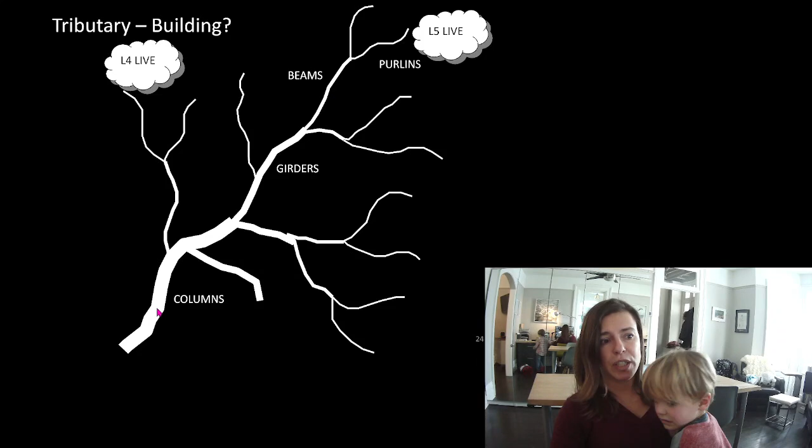If somebody stood over here on the 4th floor, it would go to this purlin, or maybe it would go directly to a beam, or maybe that purlin would go to a beam. And eventually, it would all get down here to our column.

You sit on my lap while I talk for a few minutes? Okay, come here. So I apologize, guys. This is what it's like with kids in COVID. All right?

All right. So let's take a look at that same thing as a building system. Okay? Yeah, but I want it to be a different tree. You want it to be a different tree? Well, let's take a look at this and see what it looks like.

Like I said, if you came across a piece of steel in a building, the column's pretty easy to tell. It's the thing that's standing straight up. If you were walking through the building and you came across a piece of steel, you would definitely say that's a beam. But maybe in context, you'd change your mind and say it was a girder. I'm going to give you later in the term all of the information to be able to differentiate between these.

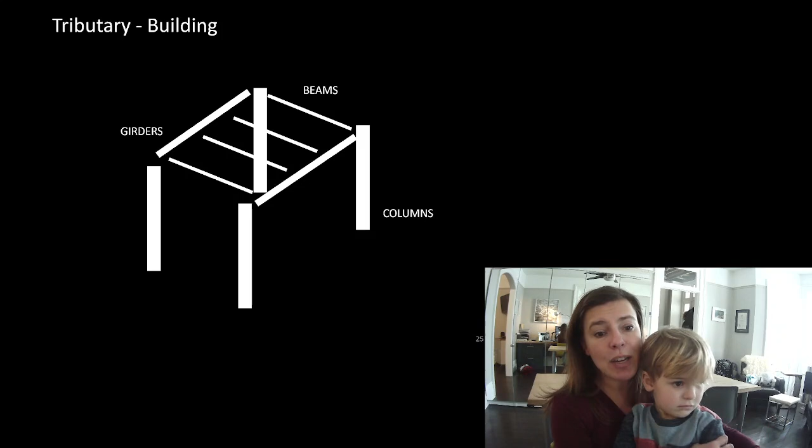If you came across a piece of steel in the building, you would say, oh, look, that's a beam. But in context, maybe you'd be able to say, yes, that one is actually a beam versus a girder. And then if you're walking through the building and you see another piece of steel, maybe you'd say, oh, look, that's a beam.

But in context, you'd be able to say, oh no, that's a purlin because it spans to a beam. There's a lot of them and they're not doing that much work. I'm going to say that that one's a purlin. Whereas this one is picking up purlins, probably makes it a beam. And this girder, it's just a beam, but it's a beam picking up beams. It's doing an extra level of work.

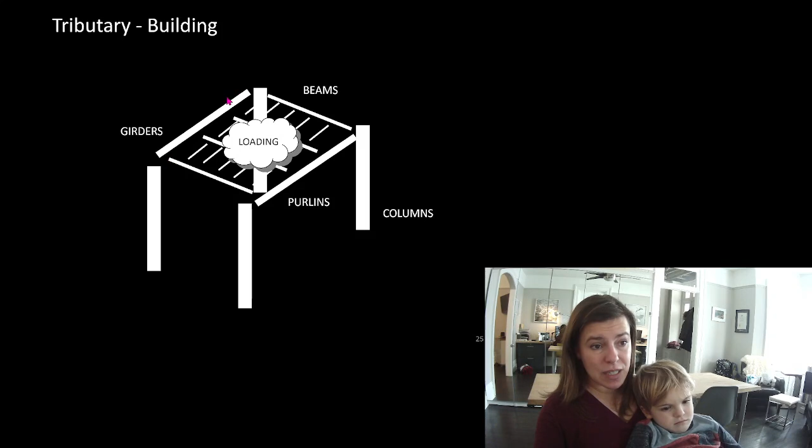And so we'd call that one a girder. We're going to talk about purlins and beams and girders a lot when we talk about size and guidelines. And so here you can have load. Maybe it's not sitting directly on this girder, but because these purlins are picking up load and it spans to this beam, this girder has tributary on it.

Okay, what is a tributary width though? Remember when I had this element here that was representing our deck and it spanned from here to here? I am saying the tributary width is half of this piece of paper. So it is loading all along that beam equally. So if we break down area over every meter...

It doesn't look like a... Do you want to go back in the other room while I finish up here? It doesn't look like a duck. Okay, let me finish this slide. Come on, Donkey. Oh, okay, Duncan, I'll come in just a second. I just want to finish this slide and then you can join your meeting.

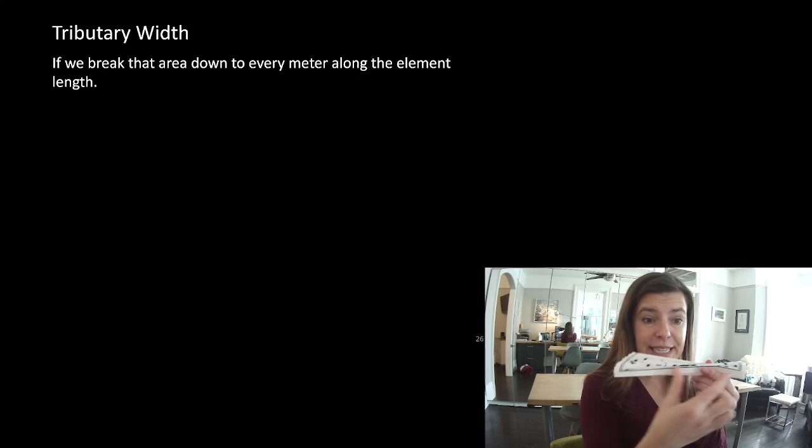So tributary width is if we break down every meter along the element's length. So what I'm saying is, Duncan unfolded my corrugated paper. Okay, so we've got this length and it has some amount that's sitting on a beam. So this beam right here, every bit of its length is picking up some amount of the deck, which we know is half of it. So that's the tributary width. The full area of this beam is half of this deck and the full length of the beam.

But what if we just said, we're saying that there's a little bit of load acting on this beam all along its length. That is the tributary width of the beam. Basically, it's one component of its tributary area because sometimes it's easier to break that component out. Think of it this way.

When I sat in the middle of this table, you understood that a portion of my load went to each one of those legs. But if it was this type of table and I sat in the middle here or I laid across this way, you know half of my load is coming over here, but it is half of this tributary width of the table and it's all acting equally along this beam here.

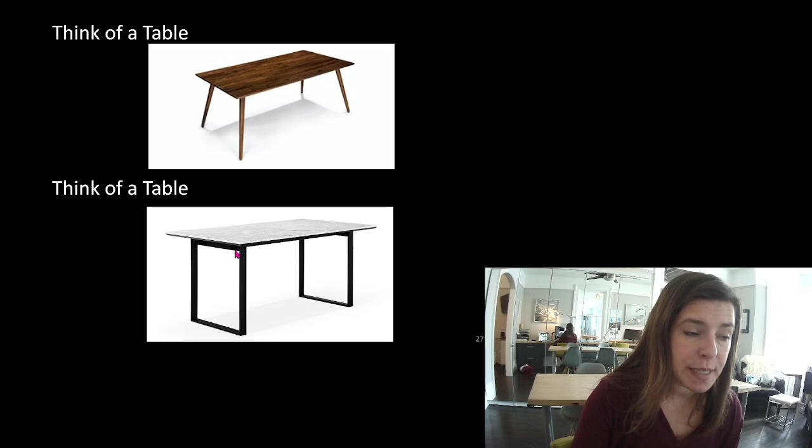Yeah, eventually a quarter of it's getting to each of these columns. But for this beam, its tributary width is half of the table. And so some amount of that load is acting along every tiny little bit of that beam. And that is tributary width. Okay, let's start looking at some examples.

And this might show up for you guys. It might be a different kind of scene in the background because Dave now is in the middle of a meeting and I've got to take over kid duty. Okay, so it is now late in the evening and my kids are in a bath.

So we'll finish up our tributary area and tributary width conversation. So what I'm going to do is I have this plan and I'm going to go through it as an example. I'm going to talk you through it. And then later in the slides, there is another example that you guys can go through with worked out solutions, kind of as an extra set of worked out problems to prepare you for the assignment.

Take your time in the assignment, talk to each other. They get progressively harder, or maybe not progressively harder, but there is one hard one, and it's the very last one. And we're gonna have to start to get good at this. This is gonna have to be the easy part.

Now, I will say, the problems that go with it get easier, and I'll start to give you easy layouts, very similar to this. So this is an easy layout. The next one is a little bit harder, and your assignment is very similar to it. But I want to give you the hardest stuff now, early in the term, for doing tributary area and tributary width, so that when we need to be able to do it like second nature later in the term, you're able to.

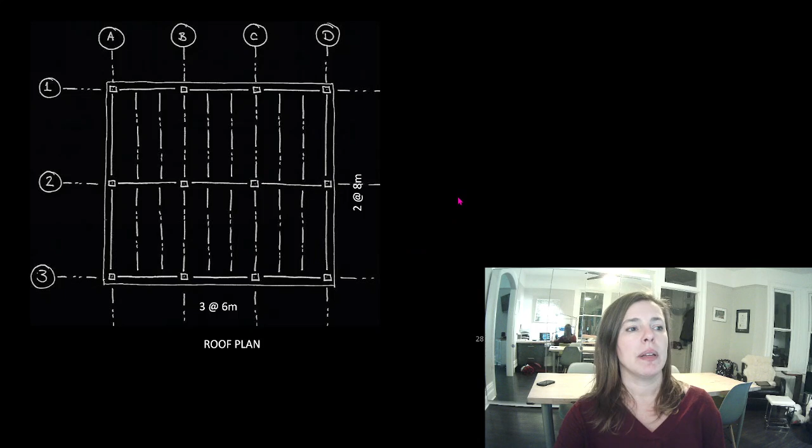Now, let's start talking about elements one at a time. Let's talk about RJ01. So let's talk about this joist right here. We want to talk about its tributary width. So what's not apparent here, because it's not really drawn, is that there's going to be deck of some sort spanning across here, similar to our corrugated piece of paper, sitting on top of all of this roof, and there is something supporting it every so often. This joist is one of those things.

So we have a series of joists underneath here, and we want to know what the tributary width of this joist is. Now, it's one piece of deck. How much of this distance here do you think goes to this joist? If you said intuitively half of it goes to this joist, you'd be right. On this side, intuitively, how much goes to this joist? Again, it's very similar to our table problem, half of it.

So let's see. So if this is 6 meters, 2, 4, 6. So each one of these spaces is 2 meters. So if we said half of this would be supported on this joist, that's 1 meter, and half of this distance goes to this joist, that's 1 meter, the tributary width of this joist is 2 meters. Let's draw that as an illustration. So its length is 8 meters. Its tributary width is 2 meters.

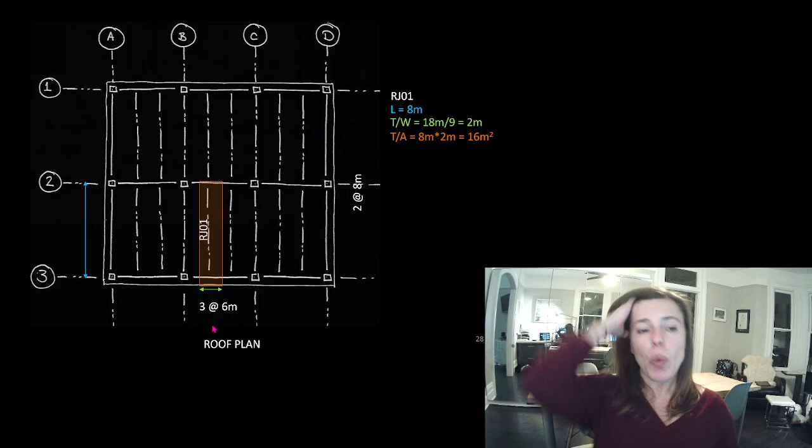What's going to be really helpful later in the term when we start talking about beams and joists is going to be talking about tributary width. That's going to be something that we really like to use, but I also find it helpful to talk about tributary area. So understanding that this is the tributary width and that's the length, and then the whole area it supports is its length times its tributary width, is going to be a handy tool to get our heads around.

Well, look at this. It looks like we have all kinds of elements that look absolutely identical to it. So every single one of these has a tributary width of 2 meters and a length of 8 meters. They are all identical. Well, what about we call all of them RJ01? Which is exactly what you saw in those drawings that I showed you earlier. Everything that was an identical length supporting the identical tributary width all had the same name. So all of these would be RJ01.

Let's take a look at another element. I don't know what one's next. Okay, RB01. So let's pretend this is our table, and these are our columns here. And this is like the table that had the beams at the end of it. And if I put all of my weight right here in the middle of this bay, how much of it goes to this side? I think intuitively you understand that half of it. This is just like our table. Well, what we're really saying is half of this entire distance gets supported by RB01. Or if this is 8 meters, half of that 8 meters goes to this beam here.

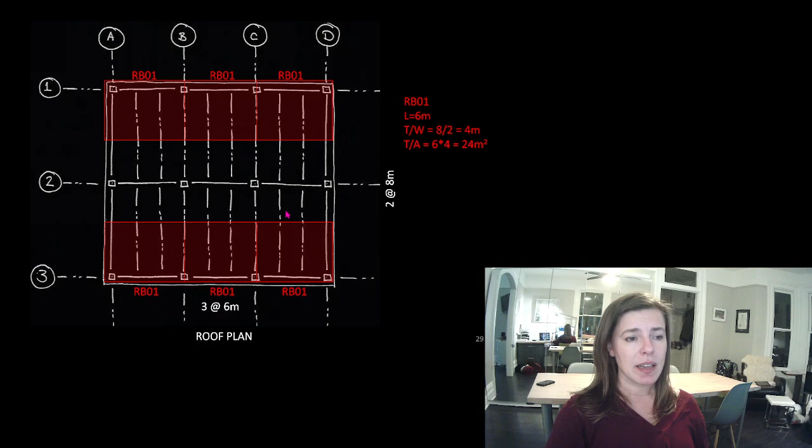How long is RB01? Well, this is 3 bays of 6 meters. Its length is 6 meters. So RB01, a length of 6 meters, a tributary width of 8 meters divided by 2, or 4 meters. So its tributary area is 6 times 4, or 24 meters squared. Do you see any other beams that look identical to it? I see a few. All of those. So look at this. We just took 1, 2, 3, 4, 5, 6, 7, 8, 16, 17, 18, 19, 20, 21, 22. We took 22 elements and we only have to design 2.

So recognizing these patterns can actually save us a bunch of time as well. All right, let's look at our next element. Let's look at RB02. So RB02, it looks like we've pushed 2 tables together or supported 2 tables on one set of columns here. So let's imagine this was one of our tables and this was one of our tables. If you break it into one at a time, it becomes really obvious that half of this table goes to this beam and half of this table goes to this beam.

Or if this is 8 meters, 4 meters of it goes to RBO2. And if this is 8 meters, 4 meters of it goes to RBO2. Or 4 meters plus 4 meters, 8 meters. How long is RBO2? Exact same as RB01, it's 6 meters long. So we've got a length of 6 meters, a tributary width of 8 divided by 2 plus 8 divided by 2, or 8 meters. So that means our tributary area is 6 times 8, or 48 meters squared.

Do we have any other beams that look the same? Yeah, we've got 2 more. These ones look identical to it. So now we're getting pretty close to the end of designing our beams. We're doing a pretty good job.

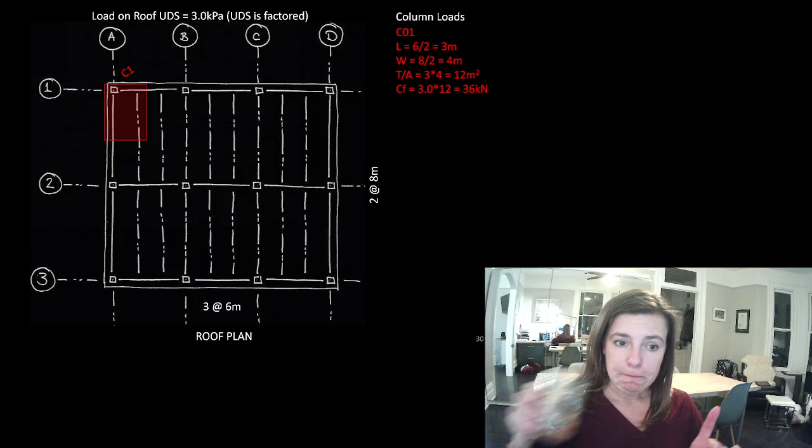We're going to talk about this, but this is handy. When we start talking about loads, come back to this slide. It's going to be handy for you. But what we're really saying is that for every meter squared, we have 3 kilonewtons. And if we have 12 meters squared, the entirety of load on that column is 3 times 12, or 36 kilonewtons. Do you guys see any other columns that look identical to this? Yeah, those 4. They are all picking up 1/4 of a bay.

Let's look at column 2. Well, column 2 looks like it's doing the exact same thing as column 1 in this bay, and then the exact same thing as column 1 in this bay, where we've got our same 8 meters divided by 2, so 4 meters. But then here, each of these bays is 6 meters. It's picking up a quarter of this bay, so we've got our 6 meters divided by 2 is 3 meters. But the same thing happens in this bay.

This is where it's handy to draw it. And this is what I would always recommend if you're unsure. Take a piece of paper, draw it, color it, help yourself identify it. That's why I've broken these into different colors. Let's take a look at this. What we're really saying is 6 meters divided by 2 plus 6 meters divided by 2 times our 8 meters divided by 2. Intuitively, you understand that this is how much of the area this column is supporting. Doing the math tends to freak you out, but if you take it and draw it first, it starts to be a very handy way to talk about it.

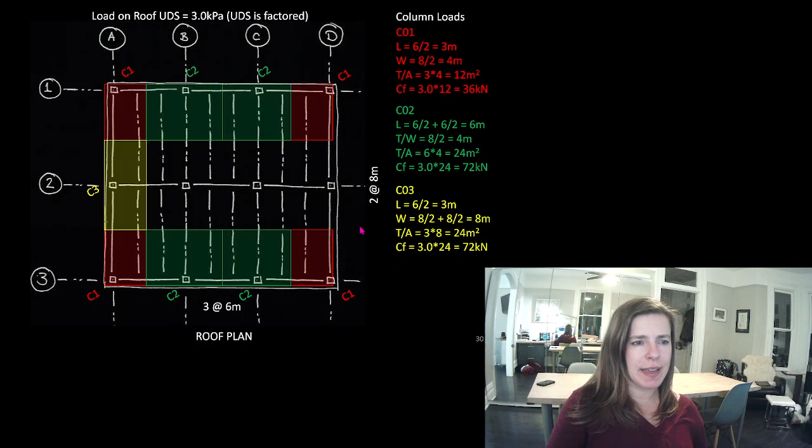Okay, do we see another column that looks like this one? Yeah, this one over here. What's interesting is this area is the same as this area. It's proportioned a little bit differently, and maybe you'd want to make them the same, call them all the same column type. It's harder to kind of identify them differently. I would probably keep them as 2 different labels, but again, no big deal. It depends on what mood you're in at the time. So now we've got those 2 that are the same.

All right, let's look at column C4. This column is picking up a quarter of this bay, a quarter of this bay, a quarter of this bay, and a quarter of this bay. So we know it's picking up 4 of these. And if you wanted to think about it this way, C2 was picking up twice as much as C1. C3 was picking up twice as much as C1. And C4 is picking up 4 times as much as C1, because really, it's 4 of these little squares.

So there we are. Here, let's make me a little bit smaller. We've got 6 divided by 2 plus 6 divided by 2 times 8 divided by 2 plus 8 divided by 2, or 6 times 8 is 48 meters squared. Again, if we wanted to say that every square meter of this surface was supporting 3 kilonewtons, we would say that we've got 144 kilonewtons on this column. But don't worry about the last line calculation too much. That's just to help give you some information for where we're going on this.

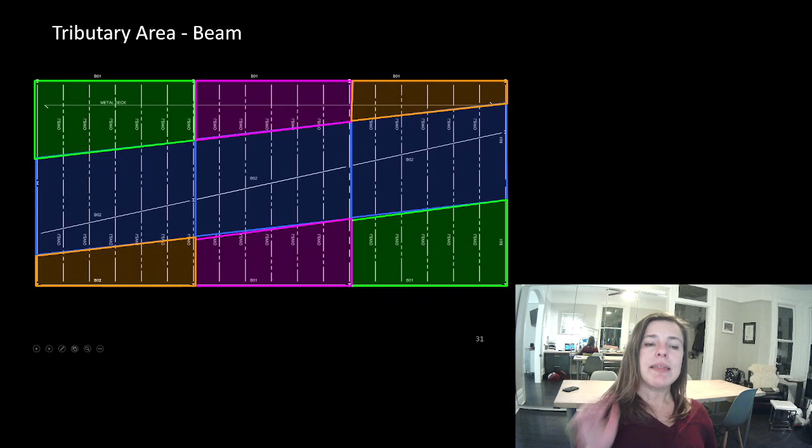Now, this beam here is actually the same as this beam. These two beams are the same, and these two beams are the same. And this is where it's really handy to sometimes draw these things out. Okay, there's one more plan with a set of examples. Now this one is written in imperial, so we've written it in feet and inches, and you're gonna have to convert it into metric. It's worked out on the next page. Take a few minutes and I want you to solve L2J01.

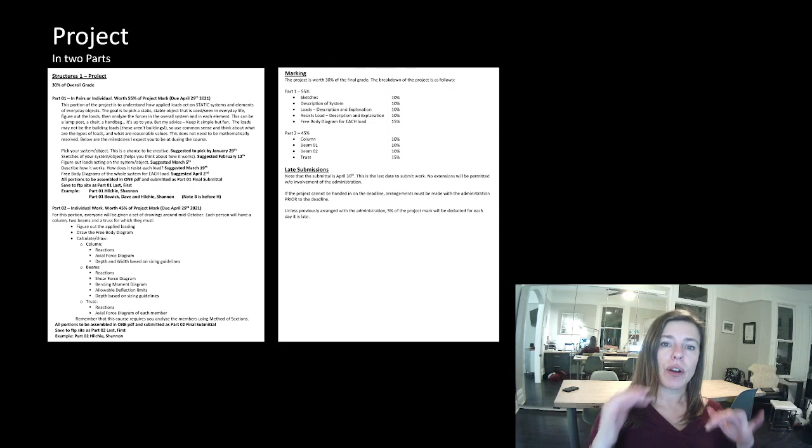I've seen people do things like a teacup. So they've thought about a teacup sitting in a saucer filled with liquid, being held by somebody in the hand, because it's a different system when it's being picked up and held. I've seen very boring things, like somebody doing a table. Please don't do a table. It's about as boring as you could possibly imagine. I am going to, several times throughout the term, basically draw the free body diagram of a table, which means it's hard for me to give you lots of really exciting points within it.

I have the point system. I've kind of talked about what's going to happen in this project. So take the time. This is posted. You can read the project outline. And part 2 will start to be more apparent as we get through the term. But feel free to reach out with any questions. You want to just start thinking about your object now. I gave some suggested dates for where you should be in your part 1 project. You can do it with a partner or not. It's up to you.